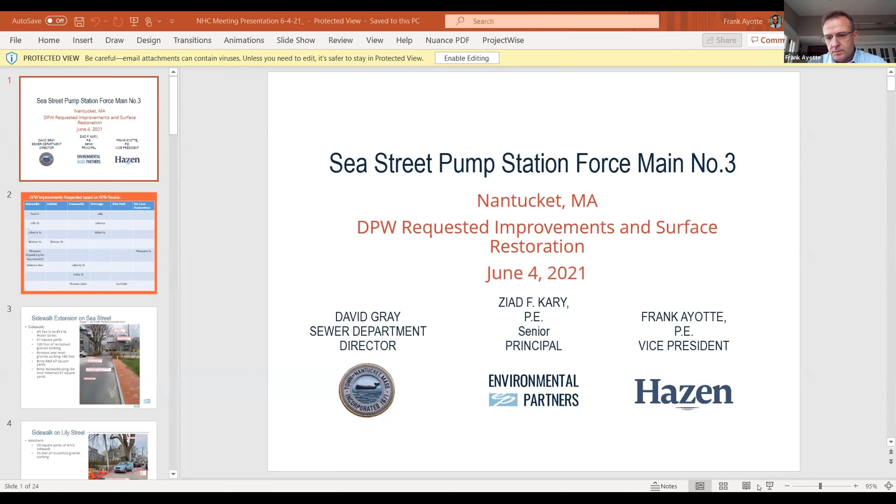So as David mentioned, I'm Frank Ayotte, the owner's project manager for this project, overseeing our designer selected for this project, which is Environmental Partners. You'll hear from Ziad Kary shortly. What we're going to present here today is the DPW requested improvements and the surface restoration features along the force main.

Before we get into the details, we developed a small table to go over what was requested by DPW based on the 60% review of the documents. They include sidewalks on Sea Street, Lily Street, Liberty Street, Winter Street, restoration of the Pleasant Street parking lot, Silver Street, and Atlantic Avenue. Also under consideration is potentially cobbling Winter Street. There's some evidence that there are cobblestones underneath the existing pavement.

We're investigating this, and it'll be included in the project, but like all the other improvements on this table, they'll be included in what's called bid alternates, which allows the contractor to bid each improvement as we group them together in order of priority. That way we can see what prices we get and make sure our funding is in line. We can accept or reject, in order of priority, any of the bid alternates once the project is bid.

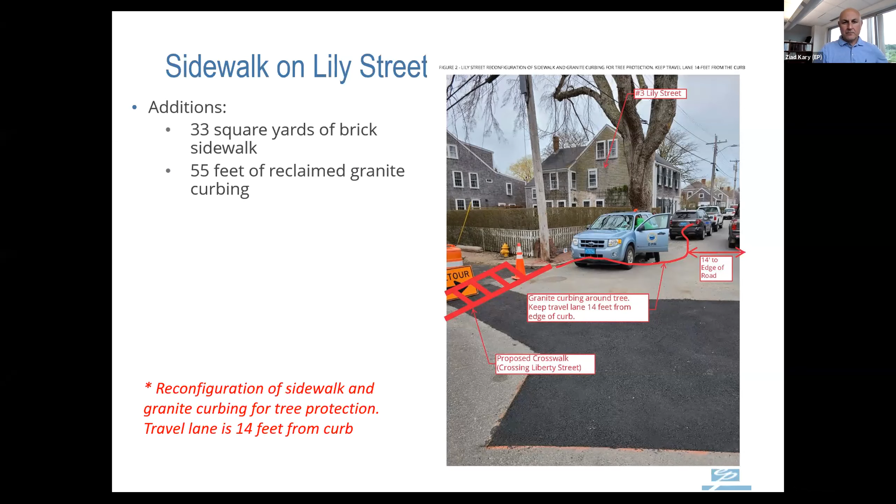This would involve about 55 additional linear feet of reclaimed granite curbing and about 33 square yards of brick sidewalk. This portion of the roadway has water ponding, resulting in icing and tripping hazards, so the intent is to connect the dots by expanding the granite curbing further north, involving almost 200 linear feet of reclaimed curbing, and improving the drainage system along this alignment to mitigate the icing and ponding.

And with the crosswalk work, you'd also do the crosswalk painting or epoxy painting to establish them and make them look like actual crosswalks.

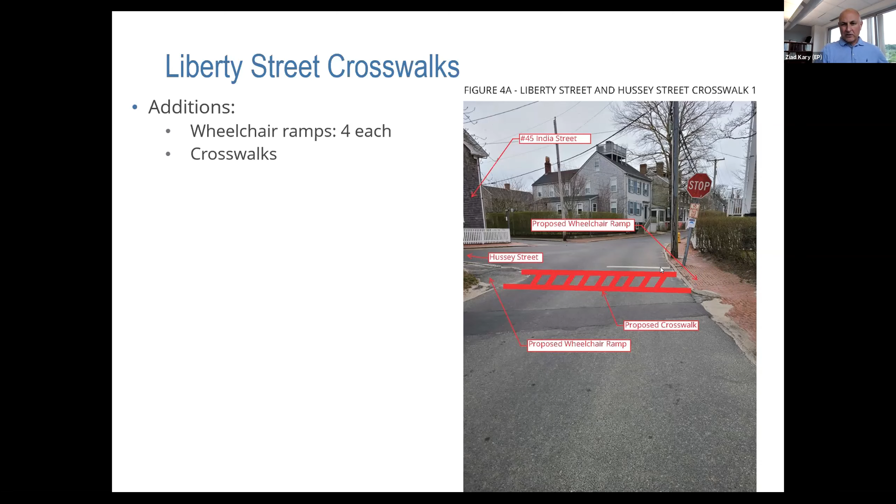At the Hussey and Liberty intersection, there's a patch of bituminous concrete sidewalk in poor shape, and DPW wanted to make that handicap accessible. On the opposite side, by the stop sign, you'd add a wheelchair ramp and establish a crosswalk to make it ADA compliant.

This is the opposite side of the street on Hussey, with another crosswalk. The curbing here would have to be reset to meet ADA requirements, the brick reset, and this asphalt patch replaced with a brick sidewalk. Here you'd have two wheelchair ramps on the opposite side, and further down another two wheelchair ramps as well.

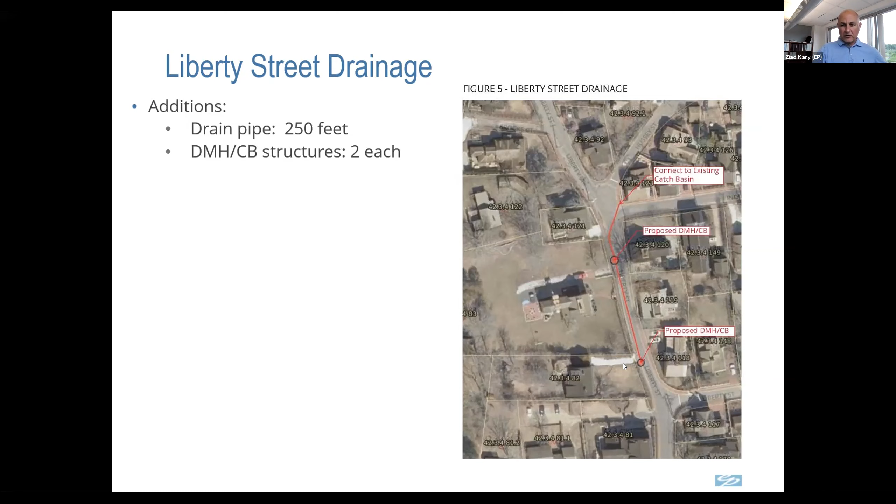This is the expansion on Liberty Street of the drain pipe, which goes hand in hand with the drainage improvement and the ponding and ice damming of water during the winter. So it's basically expanding the pipe, connecting the structures, and discharging into the catch basin on the north side of the picture. This would involve adding two structures, drain manholes or catch basins, and about 250 linear feet of pipeline.

Winter Street, Frank touched upon it. There's a belief out there that, despite the short distance, there are cobbles buried below the pavement. So in the contract documents, we're going to remove, excavate, stockpile, and deliver the cobblestones to the DPW where they're stored. They could either be used back here depending on funding, or the DPW would come back after we install the sewer force main on the left side of the road. There's a water main going below the sidewalk on the right side of the roadway, and we're also replacing the gravity sewer in the center of the road. By the time we're complete, the roadway would be disturbed curb to curb, so we'd remove the cobblestones from the limit of work, and if funding becomes available, they'd be put back as a final treatment on Winter Street.

The force main comes out of Pine Street, takes a right turn, and crosses through the town parking lot in the corner, shown with that sweep in blue. Once it's in there, it's going to be beneath the sidewalk. The reason behind that is we have two asbestos concrete water mains within the roadway, and on the left side there are mature aging trees with massive roots that we didn't want to disturb. The idea is to run the force main below the sidewalk, but in doing so we're going to clip that parking lot, which houses a lot of drainage structures and leaching fields, so we'll address what we disturb there. Plus, the idea is to repave and resurface the parking lot to improve the current surface.

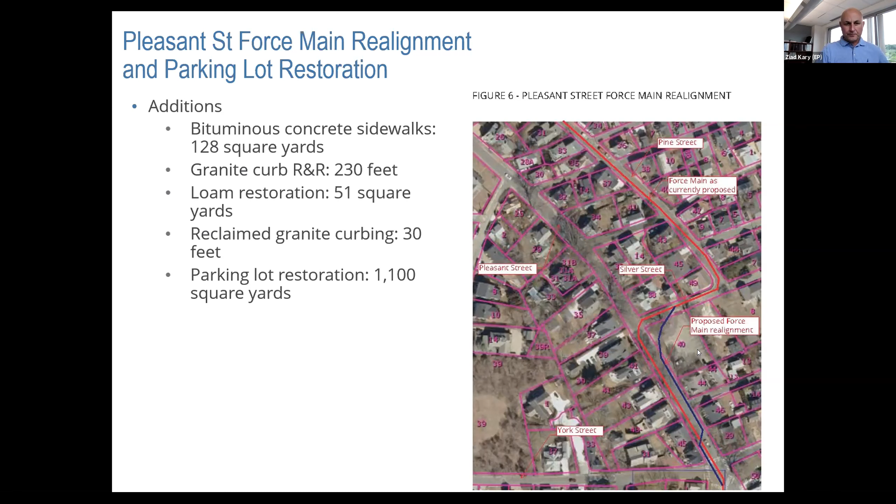On Surfside, once we're beyond Miacomet, the idea is to put the force main within the bike path. The current bike path is about 8 feet wide, and the DPW expressed wanting to expand it—instead of putting it back as 8 feet, they wanted 10 feet. By the time we install the 20-inch force main at 7 or 8 feet depth, there's nothing left of the bike path, so we'd have to rebuild it, installing a 10-foot wide bike path or surface treatment above the force main. That involves about 318 square yards of additional paving, plus loam and seed restoration of almost the same quantity, about 318 square yards as well.

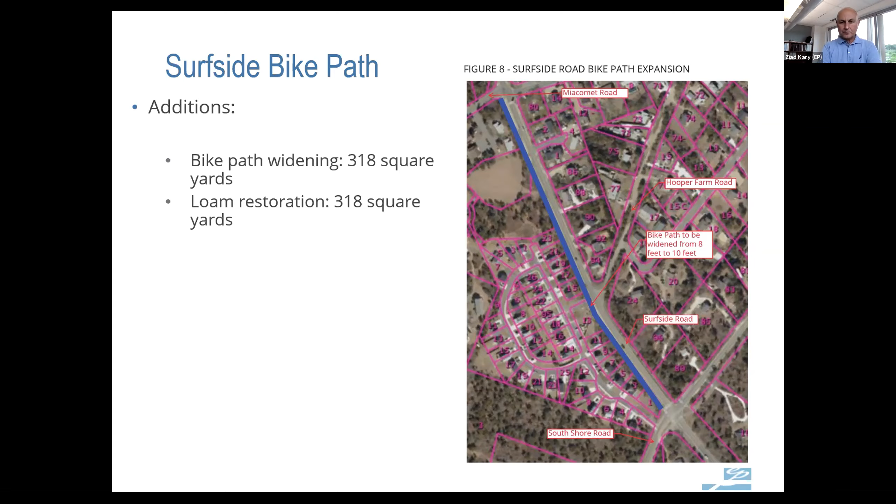And of course, the red brick is the sidewalk replacement, the brick replacement of the sidewalk, and that's really between Sea Street and, I can't really see the corner here, it's North Liberty on the bottom left, and then on the next sheet.

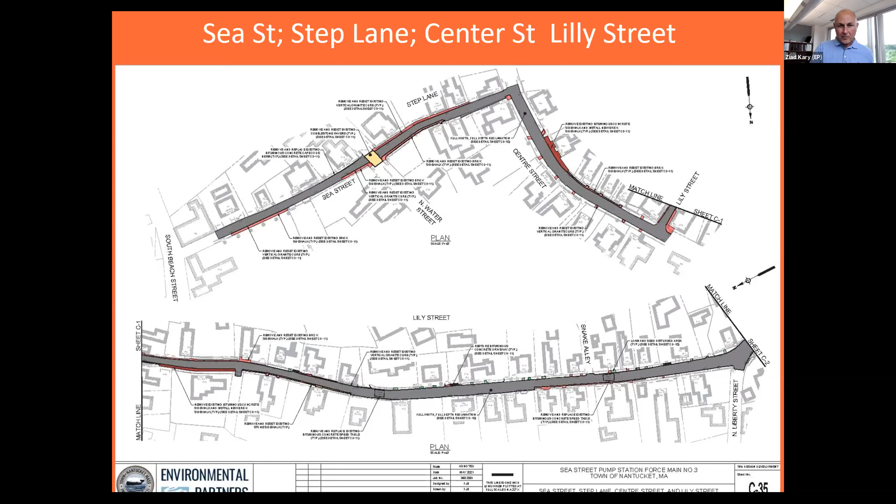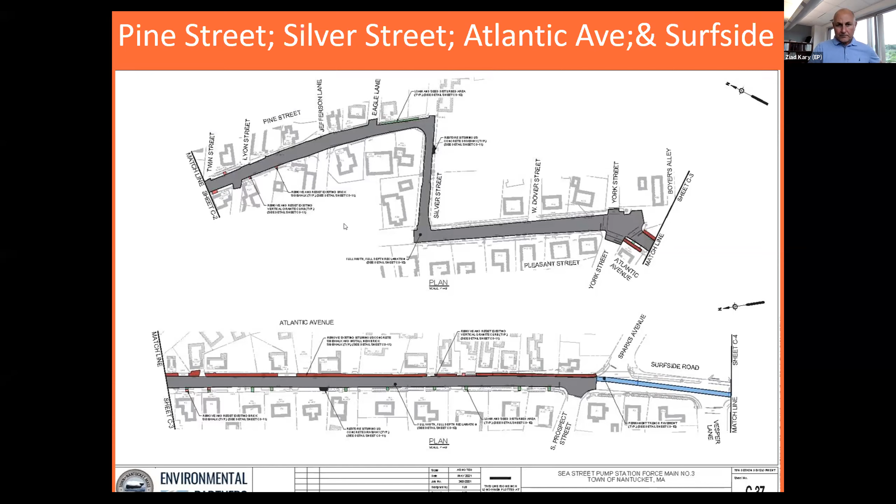Again, this is the rest of it on Surfside Road, which is the same as the previous one. On Surfside Road, from Atlantic all the way up to Miacomet, the force main would be installed in the gutter on the south side of the street, and once the force main is installed, there would be a permanent trench.

Once the work is done, we'd let the pavement settle, come back and grind it, mill and overlay once the work is complete and the trench had enough time to go through the freeze thaw cycle and settle. Then once it's done, we clean it up and finalize it. The bottom blue here is the Surfside portion where the force main would be installed within the sidewalk, within the bike path.

Same thing here on South Shore Road. Basically we stay within the roadway, and David has some other plans to install gravity sewer on South Shore Road. So if you were going towards the wastewater treatment plant, we'd be using the right side of the roadway to put in the force main, and the surface treatment would simply be a permanent trench until the other portions of the work are completed, and he would come back and mill and overlay it.

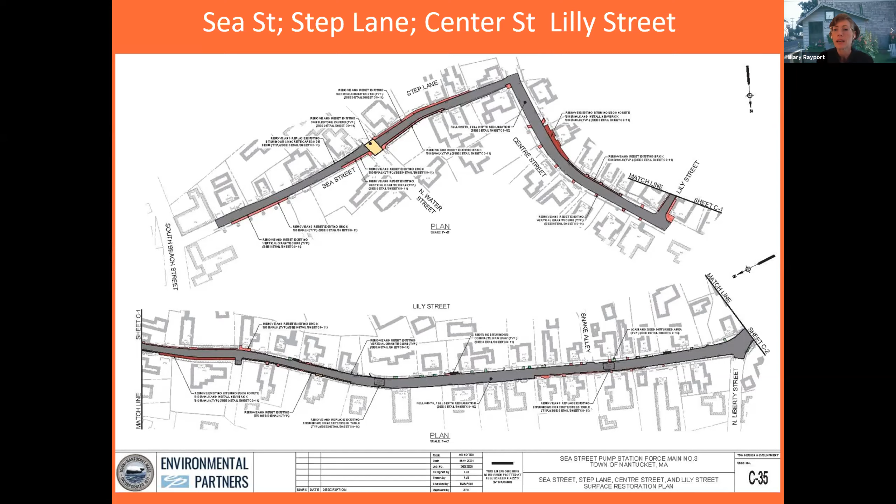Tom, Frank, would it be okay if I shared the document we put together? It might help organize the things Tom and others are concerned about or have questions on. Sure, could Hilary bring up some of the items and locations on Lily Street while doing that.

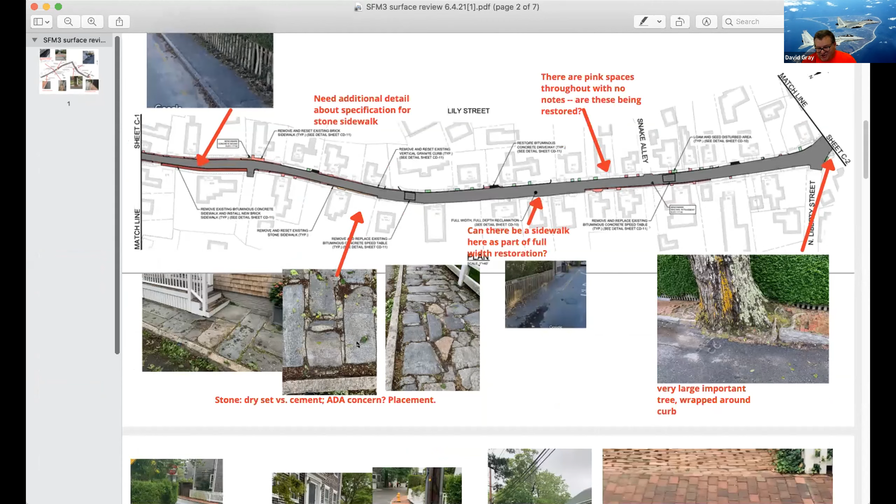We will need to address the areas in red because the current gravity sewer line on Lily Street is not within the proper road layout as it is now. It actually goes very close to or under a couple of homes on Lily Street. So when we come through with the water, sewer, storm drain, and gravity line work on Lily, we're going to try to realign it to get it off of where it shouldn't be, especially the gravity line. I know this home specifically that Tom's talking about on Lily Street.

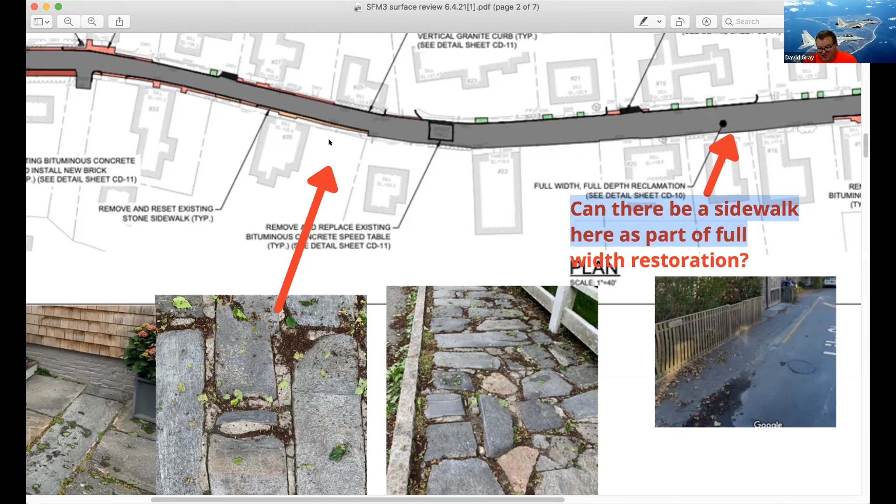This is one of the areas where the alignment is wrong, down closer to the old Bennett property, that's where we have an alignment issue. Where this house is, not so much, but if there's something there, we're planning on returning it to prior-to-construction condition to the best of our ability. There'll be two issues there - you may have a situation underground, and this property would be adjacent to the Bennett's garage. We're also concerned about any ADA situation, Mickey can speak more to that than I can.

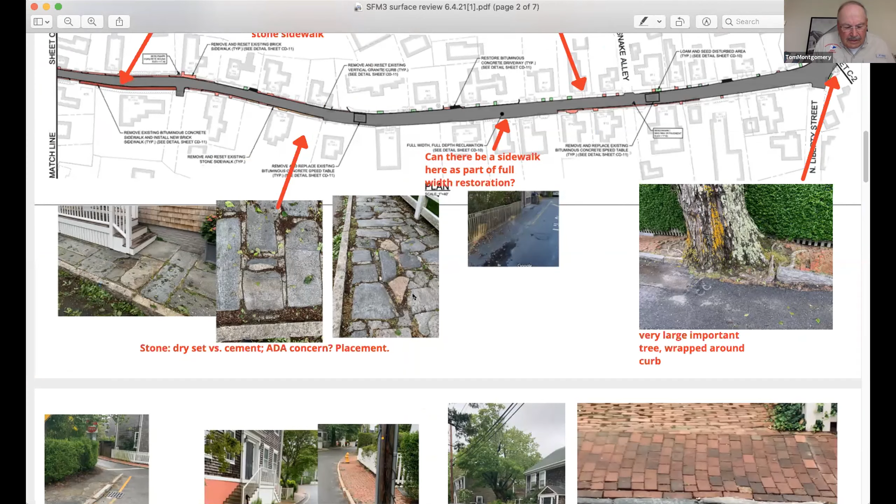Let me go on, I don't want to belabor all this. On Liberty Street, where you show it meets North Liberty Street and Gardner Street, that section there by the mailbox up Gardner Street - that's a very, very narrow area.

If the curb was low, like they were going to do on Sea Street, I could see that. But I live on North Liberty Street and go by there 20 times a day. I've actually been in an accident right there where they're going to put that handicapped access across the street, and they put a stop sign there for that reason. But when somebody comes around from Hussey Street and makes a sharp right turn, or is coming down from Gardner Street onto Liberty Street, and eventually either Lily or North Liberty Street, that section is only one car wide.

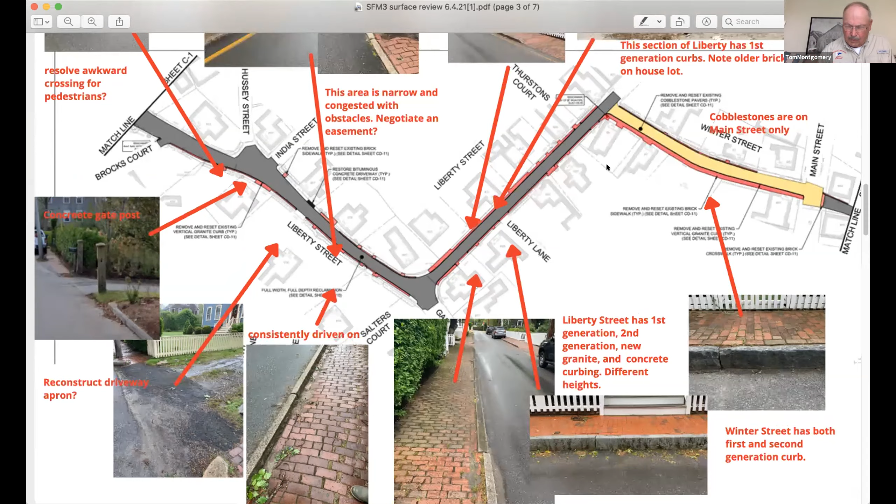So if there's a sidewalk and curbing there, I think that's going to be really narrow unless they make it a 1-inch reveal. The reveal in some of these curbing areas - many of these roads are impassable without accessing the sidewalk, particularly on some of these two-way lanes. So the curbing will not be a 6-inch reveal, because it would be problematic to even pass a car. The curbing reveal will be somewhere below 4 inches or so, because most of these streets were designed for a horse and cart.

And on Winter Street, there is some antique curbing, or schist I believe, on the left-hand side where there's going to be a lot of digging because that's where the water main is. I'm interested in the cobblestones - I don't know if it was you guys or the town doing something else, but they dug a trench there last year, the full length of Winter Street. I don't know if that's when they discovered the cobblestones, but I think so. That was the DPW installing a drain pipe in the middle of the street, so that's where the evidence of cobbles came from - just being mindful of this project.

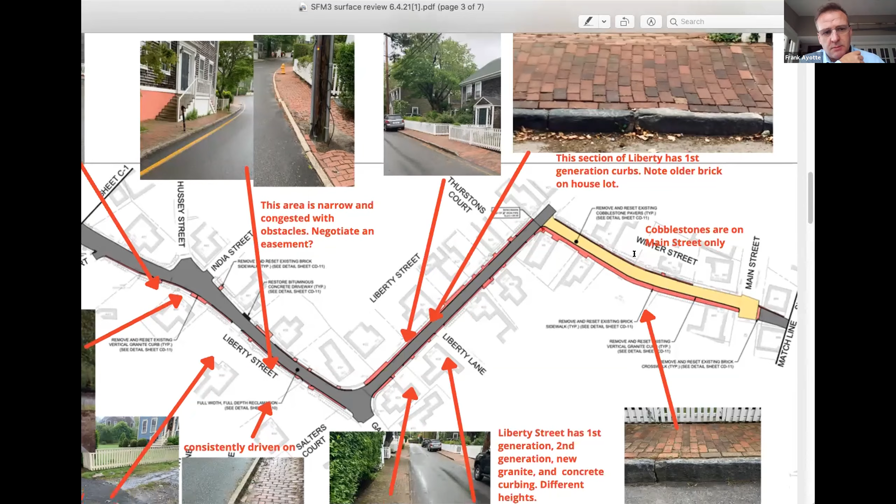Yeah, it's important. It's pretty much a means and methods thing by the contractor, but he'll be directed to do that. The brick is generally stockpiled. It's a smaller piece that can be fit pretty much as you take it apart, you can put it back together because it's small enough. But the curbing is a different animal.

If I could jump in quick. One other thing that's going to be a requirement in many of our jobs, at least since I've been in charge, is we do pre-construction video and photographs of all areas of construction. Then during the project, we will have an engineer on site the whole time, photographing all the work. At the end of the project, we will be able to take the pre-construction, during construction, and post-construction to match everything up.

We did that with the Sea Street renovation project that Frank was the design engineer on. We actually even did 3D video and photographs of that. That's important to me, as a local kid anyway, to bring everything back to what it was the best we can. So that will be another piece of our requirements that we will look for from the contractor.

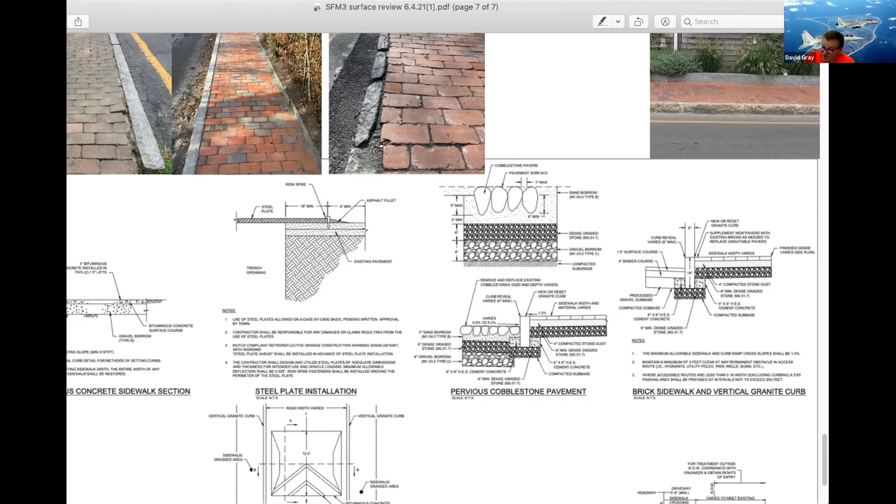To add to that, we do have what's called geotechnical monitoring because we are digging trenches next to older homes, some with brick foundation shelving. We do install almost like a nail in the foundation to monitor whether or not there's any movement, and that is certainly along the historical district where the homes are. This becomes pretty critical, so in addition to the construction photos, we will be monitoring the earth in the vicinity of the trench to ensure there's no movement.

Frank, on that topic, I put up this specification page so we can talk specifically about some of those details, but since you bring up the foundations, how deep do you expect the trenches to be along the route? Sure, like on the narrow Pine Street, which is densely populated with quite old homes and very narrow streets, how deep and how wide at full depth will the trenches be?

Sure, Ziad, I'd like you to comment on that since it varies along the route. Yeah, absolutely. So basically, the force main is the lifeline of everything. If the force main were to be compromised, I don't need to tell you exactly what goes on, but stuff flies all over the place. So we'd like to keep it deeper than existing utilities. If we're replacing water, sewer, drain along the corridor in the alignment, at a minimum the force main is probably going to be running between 5 to 7 feet deep.

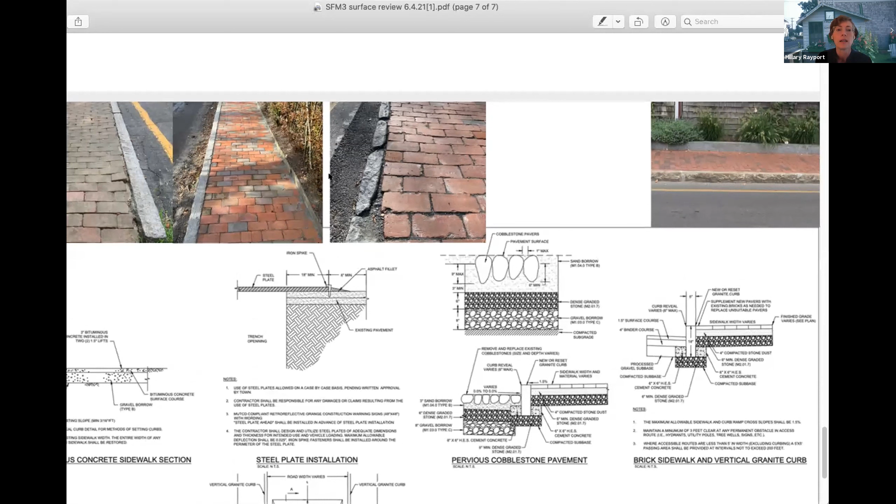I want to point out a couple things — some of these photos were in our document on preservation and maintenance of historic pavement. You might have seen it before, but this is what we ended up with here: this picture where you see new asphalt and the schist curbs just barely peeking out. This is on Fair Street, right around the corner of Judith Chase Lane.

So this is a picture of the sidewalk on Judith Chase Lane before it was lifted and reset by the DPW. And this here on the right is the sidewalk — not exactly the same place, but it's a very short street, so you basically get the idea of what it looks like along the whole length.

You can see there were a lot of bricks that needed to be replaced — I'm not sure why, presumably they were broken. The curbing looks good; we would have said this sidewalk doesn't need to be replaced, that would have been our view, but it was replaced. I think you can see the effect of the brick. Then when the work wrapped around the corner to Fair Street, where these very old curbs were — Judith Chase Lane had these second generation curbs, but on Fair Street they ended up with these curbs just barely peeking out of the asphalt, and they're in a concrete trench.

So how can we adapt this specification so that we've prepared and planned to accommodate the material? We don't want to come into a situation where the intent is to save the material, set it with the correct reveal, but we've created a situation where the people in the field can't actually do that.

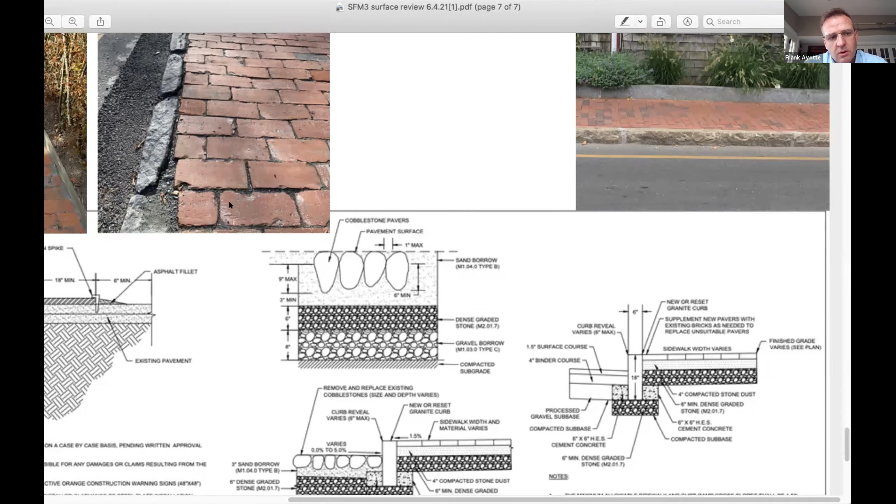You mentioned you didn't know why the sidewalk in that picture had to be replaced — our view on something like this is, if we're not impacting it, we're not touching it. That's kind of the tact we've taken during the design and routing of the force main.

That's great, and I also just wanted to call out for everybody this detail that you have here.

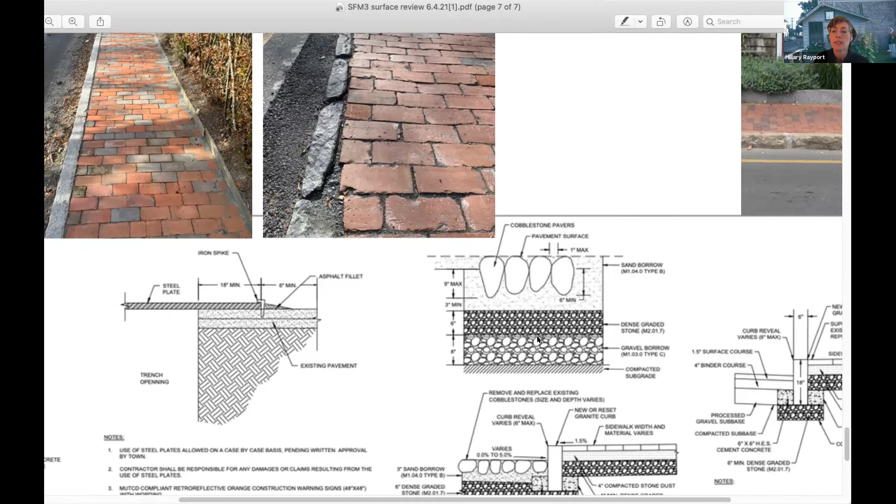We can hear from other commissioners as well, but I think everybody would say that this looks quite good because it's particularly meant to be pervious. And past specifications of cobblestones have actually intended to be impervious. And you're the stormwater people, so I'm sure you understand why it's better to have it be pervious.

So one of the objectives that we have based on the engineering report we shared with you, that was shared with the town and us, was could we do some tests? Is this an opportunity to do some intentional tests of the cobblestones?

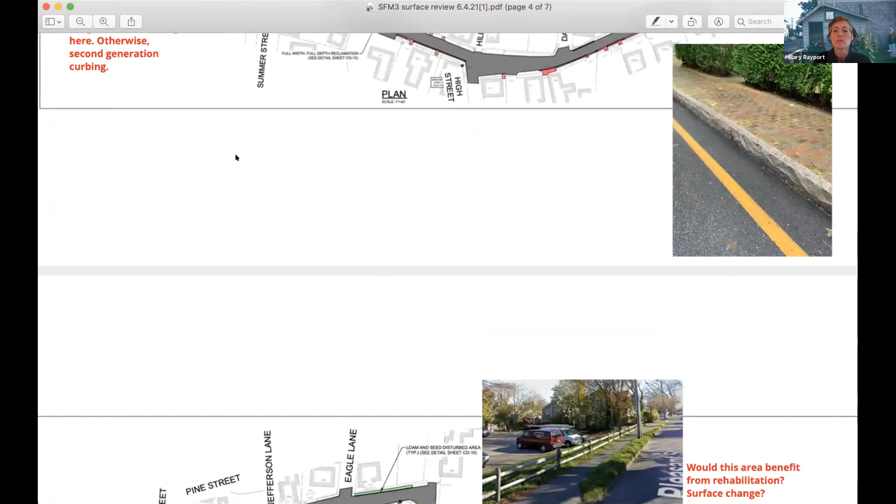So where you cross Main Street - I'm just finding it, well, I mean it must be here. That's Pleasant Street. Where you cross Main Street here, and also where you cross North Water Street, you'll have the opportunity to relay these cobbles, and you'll be using a specification that's different from what the rest of the street was laid in.

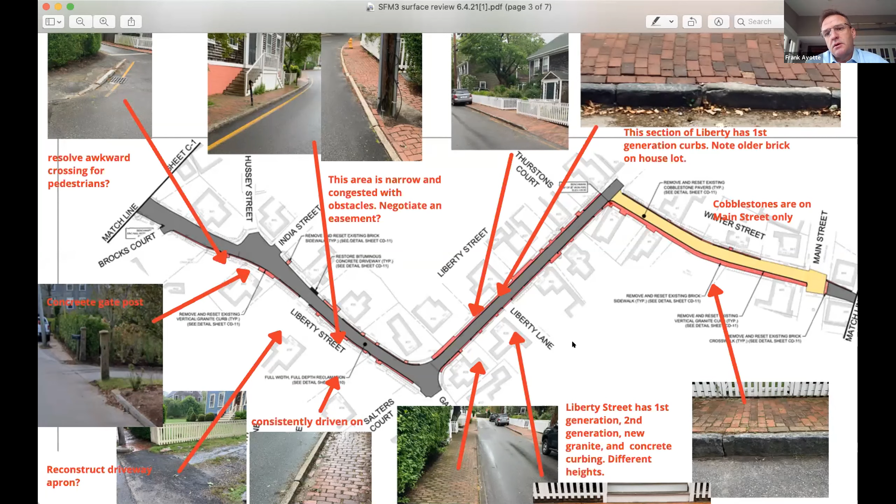Have you seen this what Stantec wrote in response to the engineering report that was done by the Community Foundation? So those details were obtained directly from DPW as the approved details for the cobblestones. I think that was all based on the Stantec report - I think Stantec maybe even developed the detail. Yeah, I think they did. Yeah, that's what we took from them, from that report.

So this detail, are you talking about this detail was given to you by Stantec? It was given to us, DPW. Oh, okay, so the DPW has then updated and modified their specification. Correct, yeah. Using the latest DPW details in what you see in this version of the design drawings.

Okay, great, we didn't know that. So that's terrific that they're being responsive. So maybe it's really a conversation with the DPW, because what we'd like to do is try some different settings, since there's no official specification for cobblestones. Try some different settings and then watch them for 4 or 5 years and have it really be an experiment. So to the extent that that could be supported in this project, I think that would be really a good thing. I mean, I think it's a conversation you probably need to have with DPW.

You know, we're taking their standards to apply them to the project, because these standards, according to them, have been vetted with the different community groups, and they're responsible for the streets. So, okay. Hilary, have you heard anything from DPW about this new specification? I have not. Okay, well, we can follow up with them. Be good, really good to understand it a little bit better since we're seeing it for the first time.

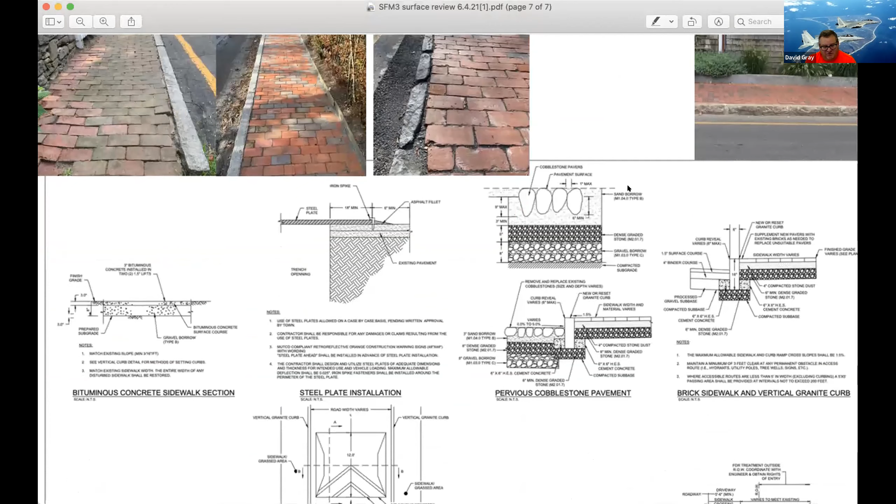Another key point on that Main Street section that you just had up, Madam Chair - that area was actually completely disturbed in phase one of the sewer repairs back in the early 2000s, stretch 2005, 2006. Yes, so I'm intimately aware of that actually, David, since I happen to live there. That layment there was definitely much different than other pieces of Main Street.

And I believe, isn't North Water Street fairly more Belgian block in certain areas than it is cobbles as well? Yeah, it's completely Belgian block, and it's also new, I think it was done in the 80s. Yeah, I think when they did something, they dug it up and they wanted the cobbles back or whatever.

I know what you guys don't want to see is something similar to, or maybe you do, is what they did at the Center Street end of Liberty Street, where everything's in a straight row. The cobblestones were laid in straight rows or whatever like that. That's something that I know Frank's team and Ziad's team will be very careful on who we have that will do any kind of cobble work in the areas that we disturb, just because not everyone can do cobblestones. I've seen it firsthand, it's a talent all by itself. And so I just wanted to call out that Main Street section, and I'm glad you were aware of it. That was not laid the old timers way, put it that way.

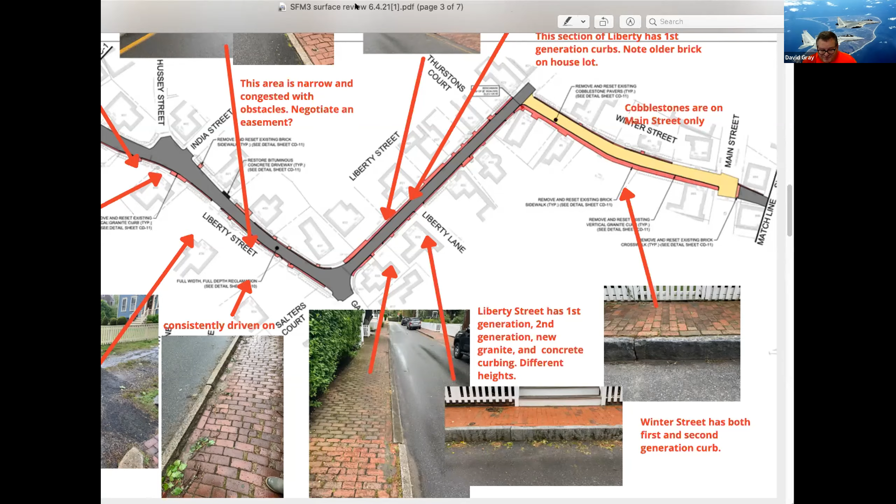One thing I'm lucky about with your commission, I've worked very closely with Mickey over the years, and for many years with Tom, so I know how some of the board members think and operate. That's a luxury most other directors don't have. So when Tom started with his questions, I already kind of knew where he was going, just because we work so closely together. David grew up across the street from our house on West Chester Street. Yes, I did.

Hilary, would you mind sharing this document you put together with us, either through David or otherwise? Yes, I can share the engineering report.

There's also a history of the cobblestone roads, which gets at exactly what David is talking about. What we've been able to put together through our research is that cobblestones were state-of-the-art pavement, the best pavement for Nantucket in its most prosperous days in the 1840s. But as the technology came for bituminous concrete, the people doing the cobblestone pavement moved into the concrete business, and the ability to cobble the roads was lost. The knowledge was lost. The roads became increasingly in disrepair because they kept getting excavated, as Nantucket was very early in sewering the core downtown and putting in water mains.

Those all went under the streets, and so the cobbles weren't put back correctly, and it was a real headache, to the point where there was a lot of agitation to just get rid of them, and many of them were lost.

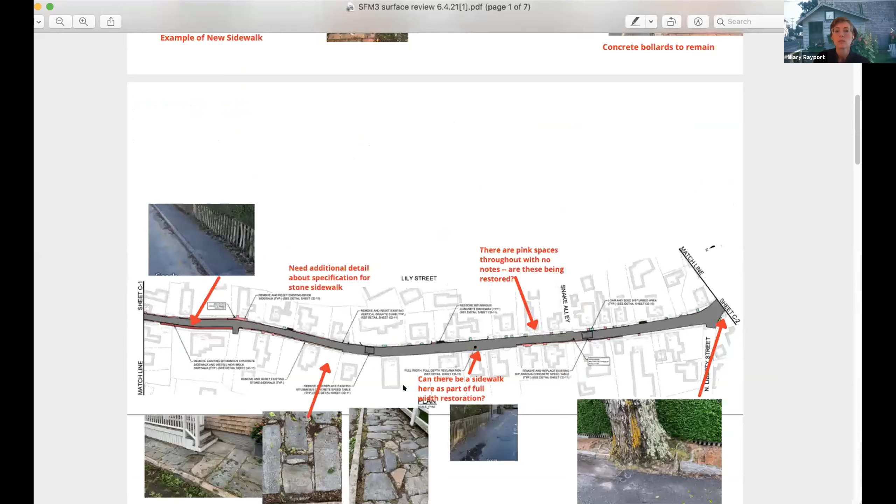Okay, so maybe we should talk to DPW. That's what we have to go through, because if we veer away from the DPW standards and this becomes more of an experiment, it would really run the project into serious delays. There's a big process into approving materials, right? So I'd recommend going through DPW on things like that, because we're taking these standards directly from them—in our conversations with them, these are the approved standards for the town of Nantucket. That's what we're operating under.

So as you can see in this picture, this is why we have— does anybody else have concerns about this? I don't want to assume I'm speaking for the commission. In regard to the type of brick— well, I'm talking about the appearance. Yeah, yes.

I think if we could explore what the options are, if they're all equal as far as price, are some going to match the non-new bricks better? Throughout town there are various styles, types, finishes of brick, but all of them seem to blend together except for the new brick, which just reads as new. So we're talking about the lower part of Main Street and maybe Water or Beach Street.

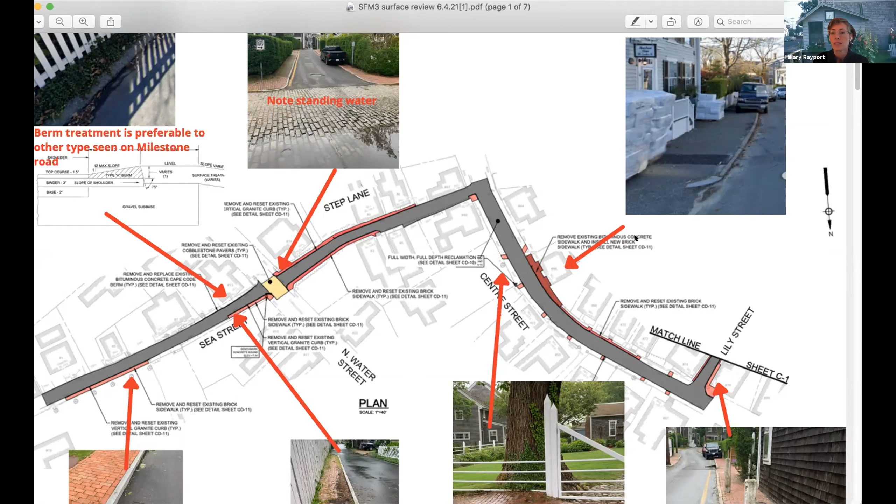Okay, well, it sounds maybe like Holly, our commission, the HDC, and the DPW should work something out and see if we can advise on this project and do our best.

If I could just jump in a little. We may be using the guidance and specifications from the DPW, but this is not a DPW project, this is our sewer project. The reason I chose this route specifically over other routes was the fact that all the sewers in these streets we will be going down, many were installed in 1917, others in 1920. So this route was chosen over others that other departments may have wanted, because we were already planning on replacing sewer, water, and limited storm drain in some areas as we were going through this whole project.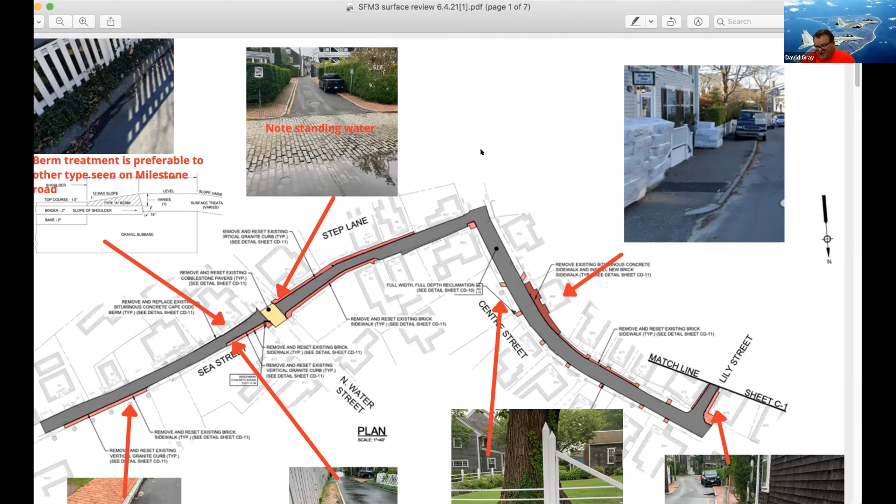I do note that the slide you have up now shows something that's been a thorn in my side for many years since I've been here, even though I don't deal with stormwater. That North Water photo showing the standing water, they've tried to put that on my plate for numerous years because I answer the phone, which I shouldn't sometimes. But that water comes from across the street, right behind that one-way sign on the left there. That's a discharge from their foundation system that pumps straight out across the sidewalk. We have tried to come up with a solution and a remedy for that. When we come through this area, will we try to install something to capture some of this runoff water? Because it impacts Matt Parker incredibly in the wintertime at Seven Sea Street Inn. We're going to try to make improvements as we go along this route.

The Sea Street thing itself, right where you have that other photo down at the bottom, at the intersection of North Water - when we do our final survey and layout, we may very well find out that fence is on town property, that it may be an encroachment. Once the teams finally do the final absolute layout, we may find some serious encroachments on some of these areas that may need to be rectified during this process.

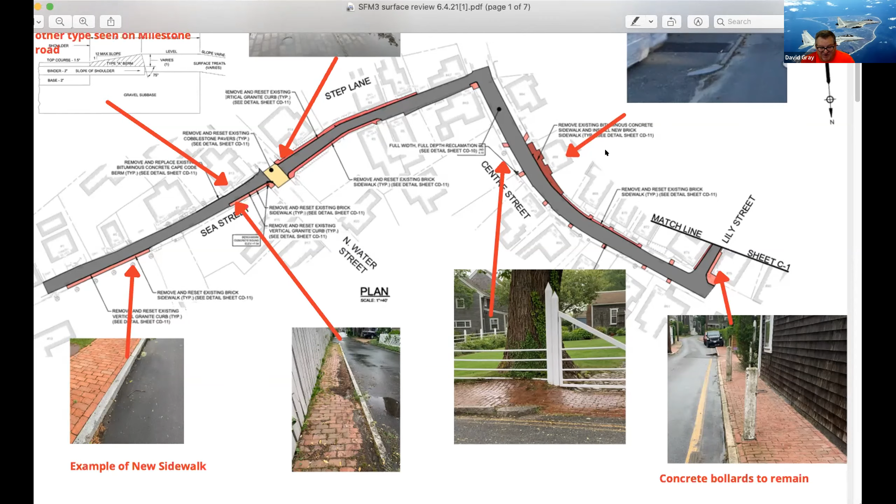Working with Mickey over the years on the commission, and Tom, things tend to grow out on Nantucket over the years, and when the town tries to come back in and reclaim it, it becomes an issue. But we are going to do everything we can to make improvements. That puddle at the end of Sea Street has been a thorn in my side since I started in my position, and when we go through there, I hope it won't be there anymore.

The reason I noted it was, we have this question about if we improve the permeability of the subsurface, would these things drain? We found a reference in archival material about this, the superintendent of streets back in the 40s talking about how the water drained right through the cobblestones and how great they were for that reason. So even though this isn't beach cobble, it is a cobblestone street. Maybe with the improvement of a sand bedding, this puddle wouldn't stand here as long.

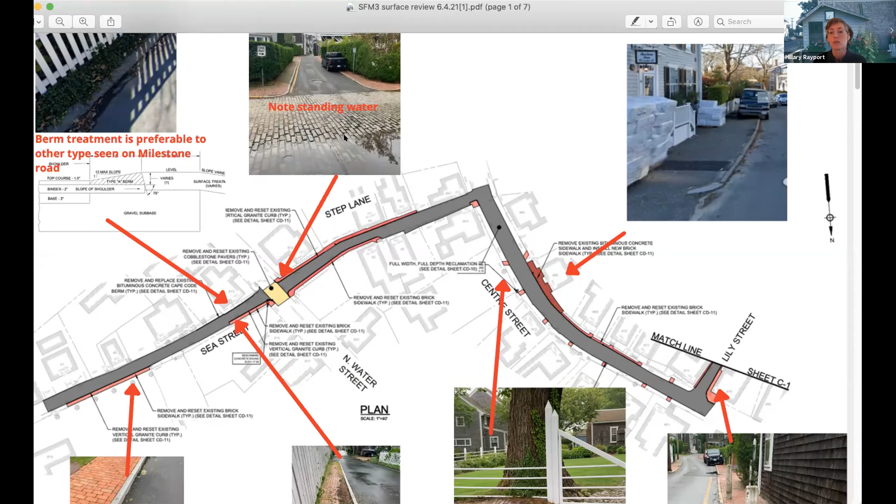This was when there was a huge rainstorm, so it's a very wet time.

Just to add to this a little bit, we've done about 132 geotechnical borings along the alignment to look at the subsurface conditions. Everywhere besides Sea Street was dry, so you didn't have any presence of groundwater. It's really a function of permeability, not so much of the brickwork, but the material that surrounds it.

And then obviously it's the degree of compaction when you put it in and prepare the subgrades to accept the brickwork. So this is something that's probably going to take some effort and research, and maybe a few trials to see what works over time. But for this purpose, we could certainly specify whatever you want us to for the degree of compaction, whether it achieves 95% below the cobblestones or below the brick, or maybe less than that, to make sure the water goes through the subgrade. But again, on the flip side, we did not find any water, which is obviously good news.

In our Division 2 specification on earthwork, we could make recommendations in terms of compaction effort and bedding based on... I just looked while we were talking, I looked at the document that was produced, but there's nothing specified in terms of the brick. I think what it says is trying to replace everything in kind. That's what they're looking for.

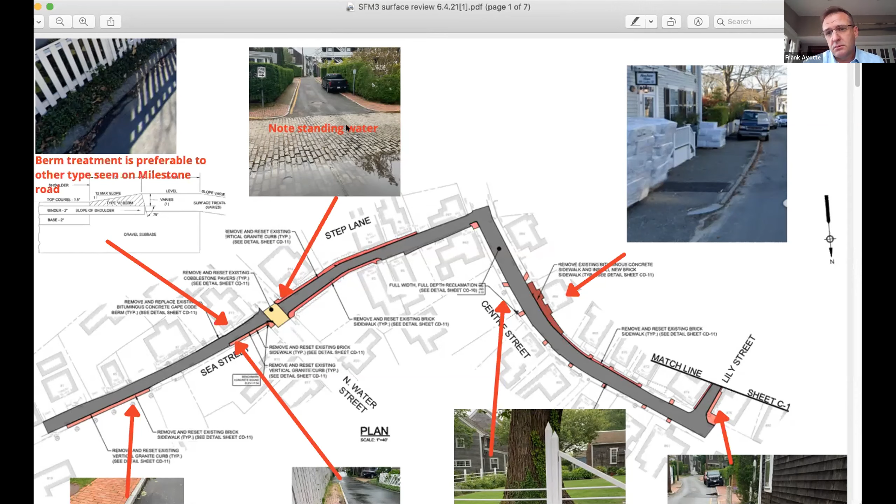We did want to comment that your berm treatment we liked a lot - when I say we, I mean Mickey and Tom and I, maybe other people have some thoughts - but it's very different from the Cape Cod berm type that's been used in other places in the new work, like for instance the bus pullouts on Milestone Road. So I just wanted to mention that.

One area, these concrete bollards - let's talk a little bit about these. This is at the corner of Lily and Center. We'd like to see these bollards stay.

They show something about how things have been done over time. I think they're fragile. Some of them are falling apart.

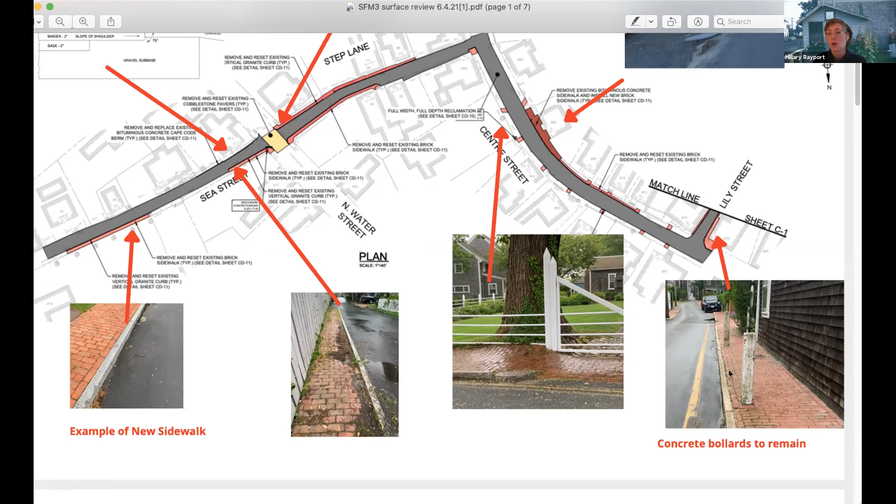I understand, the ones that are really falling apart, I don't think we're asking that they be repaired necessarily. We certainly don't want to create some false sense of history. But the ones that are there that are in good condition, we'd like to see them stay. So that probably means marking them and instructing that they remain. Yep, that'll be notated on the drawings.

Okay, thank you. Lily Street. So this stone now - Mrs. Elliott, who lives here, had all of this replaced because she did foundation work, or sorry, not replaced, lifted and reset because she did foundation work. This area obviously it's a little bit close, like as you're walking with your back to Center Street, this is a little further down. You can see it's set in concrete, and it's also got a fair amount of variability.

So the notation is remove and reset existing stone sidewalk. Presumably you need to get under here, but David, you said you might be able to move this. So our question is, do you need to lift this or has that changed? If you need to lift and reset it, there's just going to be a lot of details that the contractor is going to have to understand about concrete, no concrete, the width of the stones, the width of the spaces between the stones. So how do we get a little bit more specific about that so everybody has a predictable result? This is going to be where our pre-construction videos and photos come into play that are used very intensely in some of the planning.

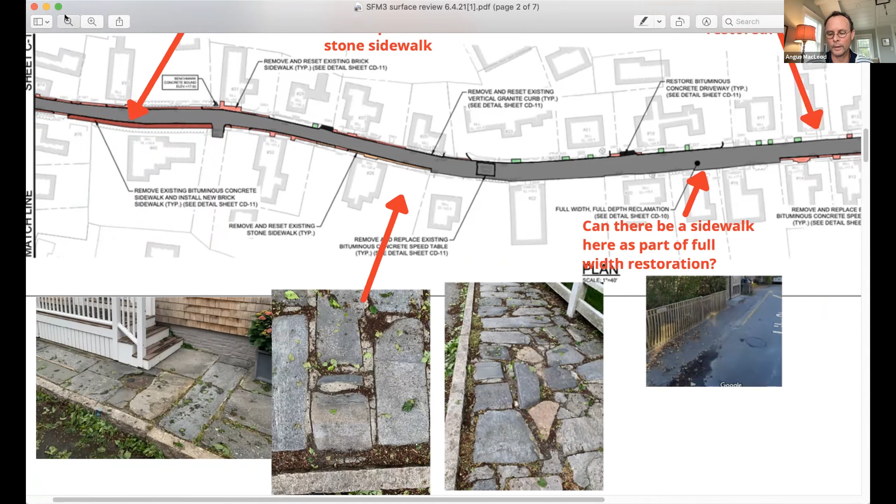Thank you for commenting on that, Frank. That was going to be one of my questions for David. When you were saying that when there's a note for remove and reset existing, when we have a situation where it's not meeting ADA or the existing setting in concrete should not be that, it should be dry laid, is that a call that you make? Because you were mentioning that you take photos, but in this case we probably wouldn't want to replace it exactly as you found it - but that's going to be a call in each circumstance.

Correct. And just, you know, common sense in something like this - the dry lay versus concrete. A dry lay is more of a natural look, more historical, through permeability and the rest of it, than say a concrete-seamed stone walkway, which will look more, I want to say, just kind of new and probably not suitable for the area, in my view.

We agree - this is something we would work with, we agree with you. We don't want to repeat what's in front of the Thomas Macy warehouse. And you don't want to try and do a mix and match of this, because that would be a disaster on an install.

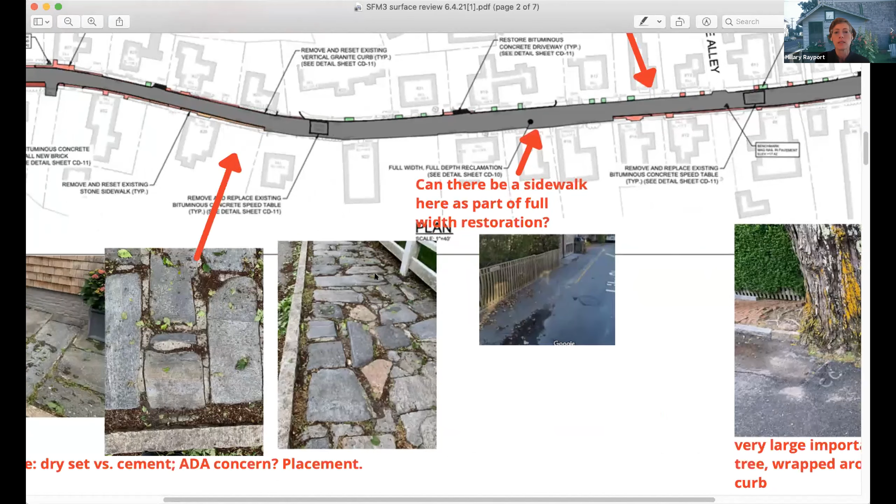Yeah, your comments about setting it in stone dust, dry setting it - it's correct in what we would agree with. We just wanted to point out that this is a level of detail we want you to be aware of so that you can be sure it's reflected in the final document.

Here, it doesn't look like there's any - we don't want to put more expense and more work on your plate, but just as, and you know, we're the historical commission, not the pedestrian - the BPAC - but I would think you'd want to put a sidewalk here where it's missing. Yeah, I think it's roughly here.

Just a few comments on that - so DPW did walk the route. Holly, were you with Rob when you walked the route? I actually did go on a walk with him and the planning director, at one point. And what came of that walk was what we presented in the presentation as kind of the most critical elements that he would like to see as part of this project.

Because you could do a number of additional improvements on the entire corridor, but some of these improvements that are requested are not funded by the force main. The SRF will not allow funding for paying for items that aren't directly impacted by the force main. So, where do the funds come from?

Well, they come from Chapter 90. Holly mentions CPC funds perhaps, or maybe even some existing funding that was already approved by town meeting for sidewalks and storm drainage. So the elements that DPW requested here all have funding mechanisms attached to them, in an order of priority to be included in this project, but won't be paid for by the force main, will be paid for by DPW through these funding mechanisms. We will be putting together a presentation for the select board that will go through these items along with where they're being funded from.

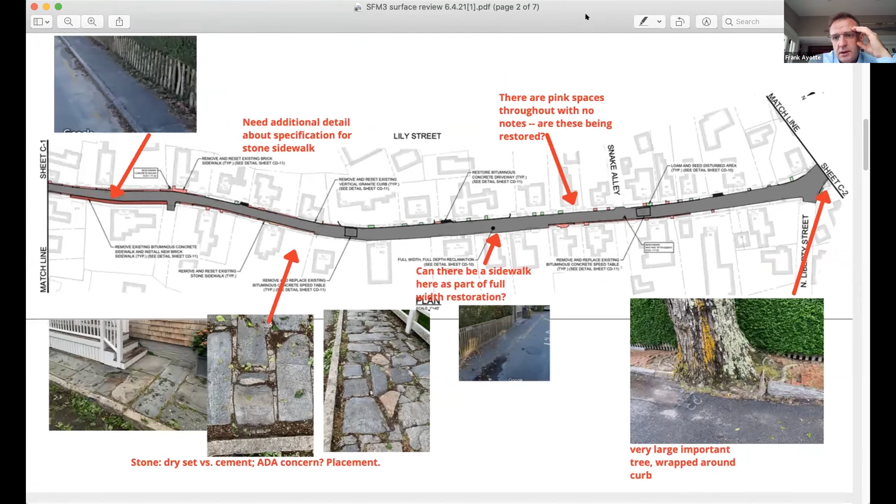So this comment, there are pink spaces throughout. We now understand these are areas where you need to disturb, and you'll lift the brick and put it back. Presumably, if you have to take the curb up, you'll take it up intact, not cutting through it. That's correct, so it's going to come up in full lengths, whatever length it is.

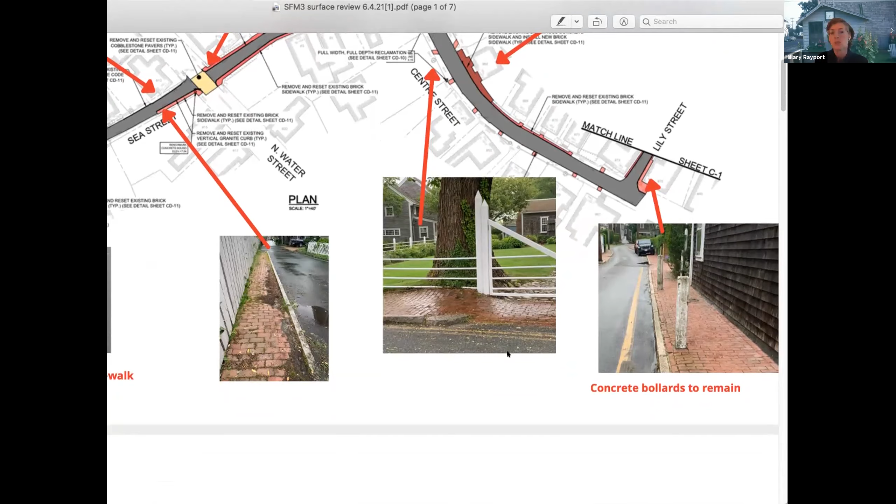So these trees, there are maybe 5 or 6 really large old elms, the heritage elms we care so much about on Nantucket. I breezed past this one where you said you're doing some modification of the sidewalk detail, but can you talk about the process for protecting the trees, especially as you're excavating? Even in the center of the street the tree roots are everywhere, so what's the process of involving arborists? This one has the tree growing right over the curb. What's the aesthetic and practical approach to getting a sidewalk here? What can we expect? That level of detail wasn't in these 75% plans.

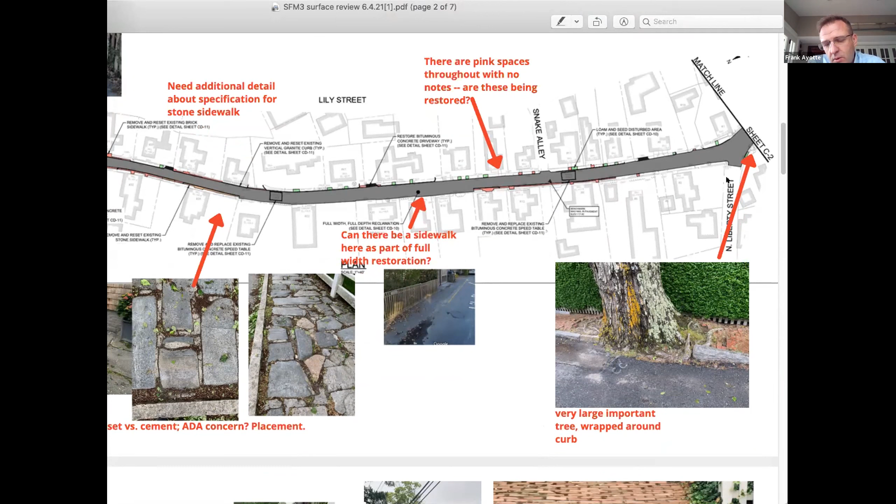Sure, I'll speak to a little of this and then have Ziad chime in. In areas like that tree down at the bottom right, obviously in the vicinity of our force main, we want to stay away from that. Even any reconstruction of the sidewalk in and around it becomes an ADA compliance nightmare on something like that, and we'd probably need a variance for it.

I can point out that where we go by the Pleasant Street parking lot, we specifically went through the lot and along that gutter line on Pleasant Street to avoid the trees on the other side of the street. That's kind of our mindset as we travel through the route.

Now, this particular tree is at the corner, looks like North Liberty Street - I don't know what the other road is. This is where Lily Street passes North Liberty Street and turns the corner to go up to Liberty/Gardner Street on its way toward Main Street. I don't believe our force main clips this area of the tree very closely. Right, this is where Rob's car was parked in that photo.

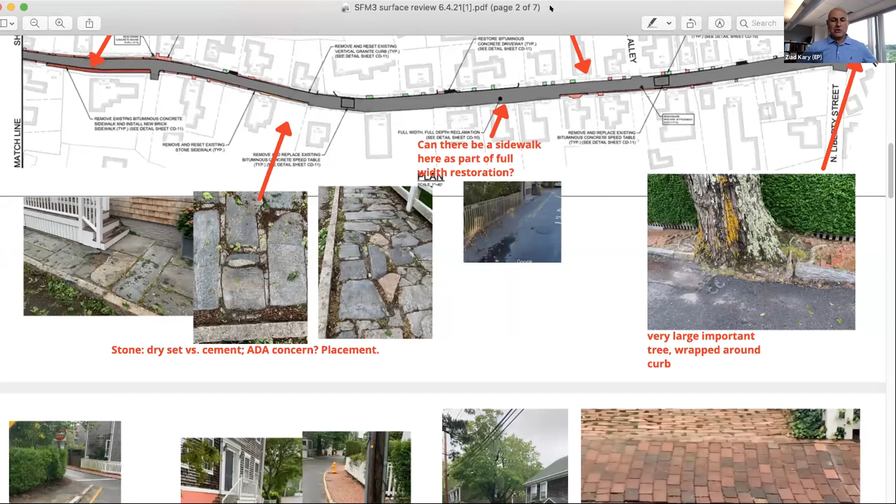So this is the area where we're reconstructing the curb around the tree. Is this the tree? No, I think where you said you were reconstructing is different - not that one, the one we're reconstructing is at the corner. I don't think we're anywhere near this one particularly. The roots could expand a little since these are mature old trees, and I don't know enough about them, but we specifically avoided being close, like the case on Atlantic - we stayed on the opposite side to avoid them. And here, I think we're in the middle of the road, so we shouldn't be anywhere near the root system.

Okay, I think this is what Ziad was describing - there was actually a sketch with a photo of the car there, and then a line drawing showing the sidewalk around it, if this was the actual tree at that corner, so the sidewalk would come around that tree. Yeah, do you want to show us the drawing? Maybe we should look at that. I can, let me bring up my presentation again. I have it open if you want me to share mine. It's up to you, go ahead, Ziad.

The thing is, when you get around the tree, then you get to the corner where there's a telephone pole and a fire plug. So you want to get access around the tree, but then you've got more stuff in the way. So does that really help?

Does it make sense? That's the tree you're talking about right there. I think that's the same one. Here, so we're not even anywhere near. Plus this curbing and sidewalk expansion or extension certainly would help. And as you mentioned, I think the curb isn't that deep anyway, so you're really not into the root system either way.

So I don't think that's an issue for us in terms of the installation of force main or gravity sewer for that matter. So it's really just a sidewalk reconstruction, and I guess we'll be able to see what they're planning when we get the drawing. It sounds like they're just trying to build the sidewalk out to go around the tree, and it'll be shallow, correct.

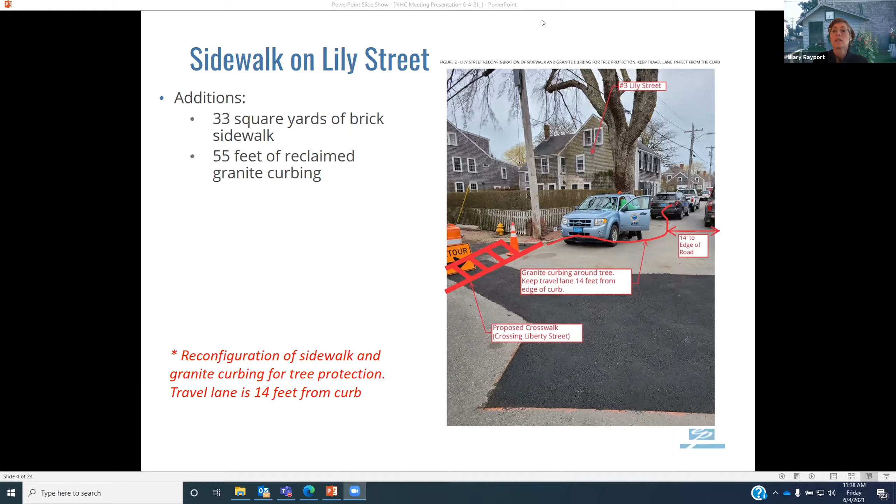Can I share that document again? I'm just going to get that back up, because I think there are a lot of things that we flagged that you all flagged as well.

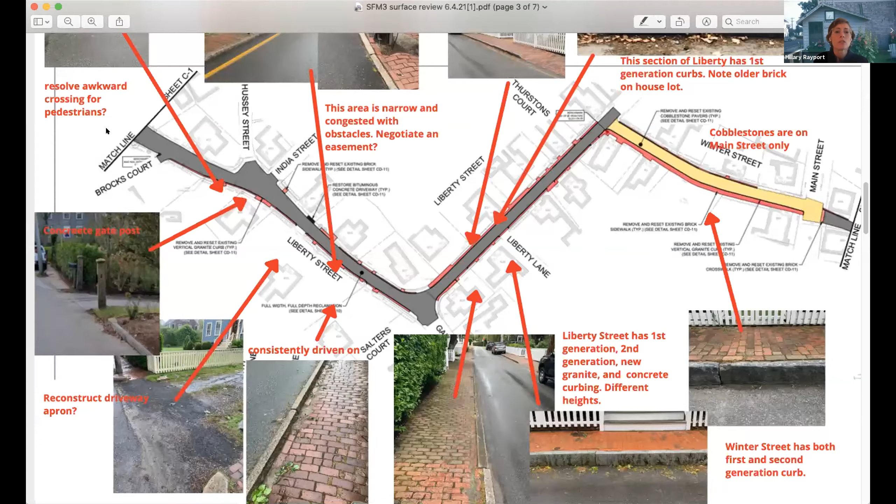Moving on to this bit of Liberty Street, we had said resolve the awkward crossing for pedestrians, and it looks like the DPW also flagged that, so we can engage with them on those details. We wanted you to be aware of these concrete gate posts right here, which look like they're right at where there's going to need to be some work, so that should be flagged.

That area is well known to us, and if you look on our plan, you'll see that I raised a concern to install some drainage in this area because of the groundwater that flows on this road all the time. I know Marsha very well—we actually just dug up in front of the African Meeting House on York Street the last couple of days. So Marsha and I have been in contact a lot about this area, and this line was also just replaced by a contractor because their sewer line had failed at these couple of homes right here.

But I know the apron is what you're referring to. I don't want you to think this is a specific request—it was an observation as we walked, that if you're paving the whole area, sometimes, here it says restore bituminous concrete driveway, but on the other side, right across the street, you've got this bituminous concrete driveway right next to this full depth reclamation, and it's not flagged. So on the off chance it was an oversight and you had intended to specify it, we just wanted to call it out as something that might be a benefit.

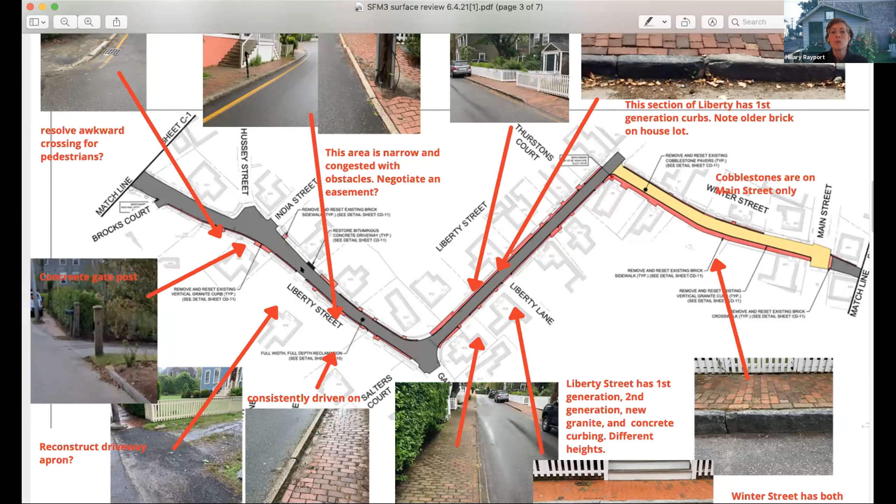Is there any possibility of an easement, of a widening here? I know we're getting into areas beyond sewer, but I bring it up because we'd like to help as advocates. The person you need to speak to is Marcia—she's not here, so we don't want to have a big discussion about her property, but is there anything we can do to help as advocates, as far as getting maybe an easement for a wider path?

Yeah, that's outside the scope of really this project, and really should be I think a town issue. I'm not sure what department would actually handle that. As part of the SRF loan, we're required to stay within the right of way and assure that we're not going on any private lands, and we've done that. So I don't know what the process would be. Maybe David, you can shed some light on that, because it does involve private property as you expand a roadway width.

Yeah, that can be tricky, especially if we end up doing a final survey on this, Frank, and find out that—and it's happened before—the road's not where it's supposed to be, or their hedge is not where it's supposed to be. It can become quite contentious on those pieces and parts.

This area I had called out specifically as it's an icing issue in the winter. The sidewalk has settled so much there because of the amount of groundwater flow that comes out of not only this home, but the home just up, which I think used to be England's home, just closer to Main Street. We were hoping to install some drainage structures in this area, which might help prevent some of this sidewalk settling that we see there.

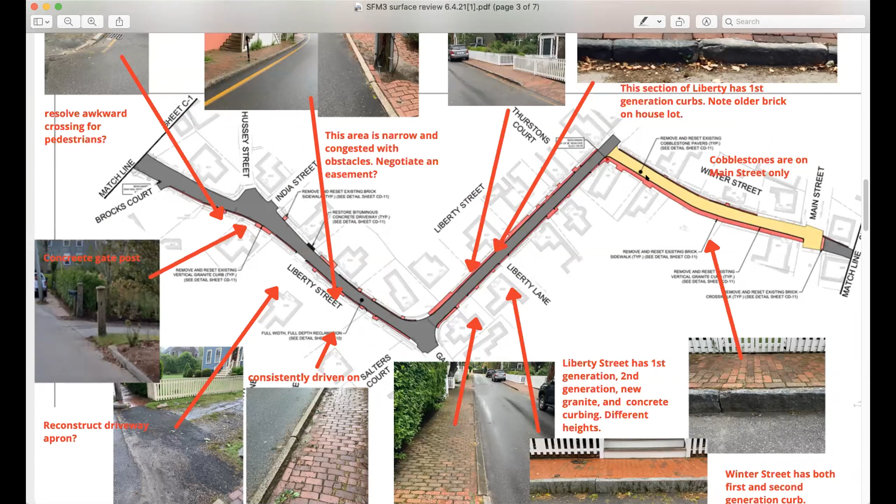But we can look further into that. That might be more of a question for Andrew, because I believe—and Hilary might be able to help me on this—I think all the roads within the current core district or whatever are considered county roads. They're not actually town roads, but I think they're county roads. Hilary, I believe you're correct that they are county roads. County commissioners have that. That would be bringing in another group, basically not the selectmen, but the county commissioners.

But I agree, I think it's important to try to separate what is actually under the purview of this project, under the scope, versus these kind of add-ons, which does make it confusing when you're trying to help address some of these concerns. But I think we just need to make sure we understand what is something driven for an accessibility perspective, which makes sense. As a planner, I don't disagree having accessibility is important, but obviously being historically sensitive, but also understanding that this sewer force main project is very important, and there is a specific scope that needs to be addressed. So I wouldn't want to hold that up, but put that off as a sidebar to say, hey, that's something to pursue.

Yeah, and it is the sewer force main project, but it also is a project that is improving accessibility in targeted areas. So it's a hybrid project. Also, when the work is so comprehensive with sidewalks, curbing, streets—as much as it seems like a distraction to try to pull in another aspect, it also kind of makes sense to tie it all together, since it's all getting disturbed anyway.

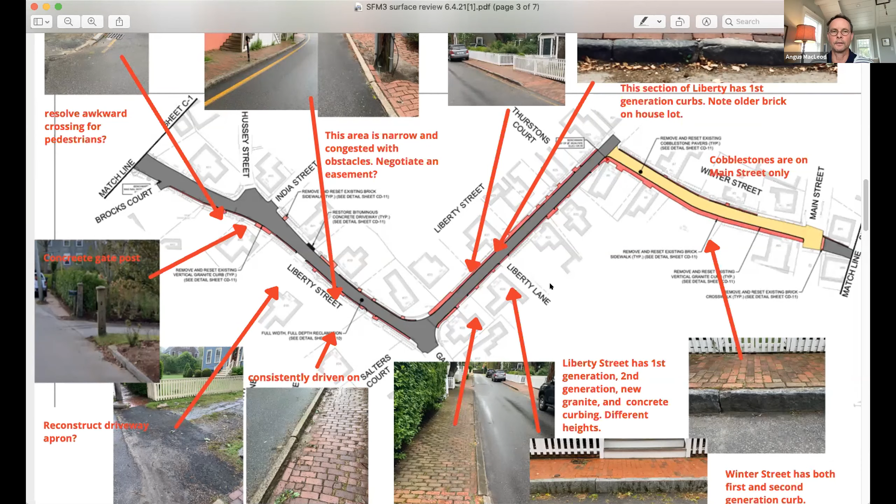So like Pine Street, where people are pulling off, and along Liberty Street where there's a bottleneck, those areas would have minimum curb height.

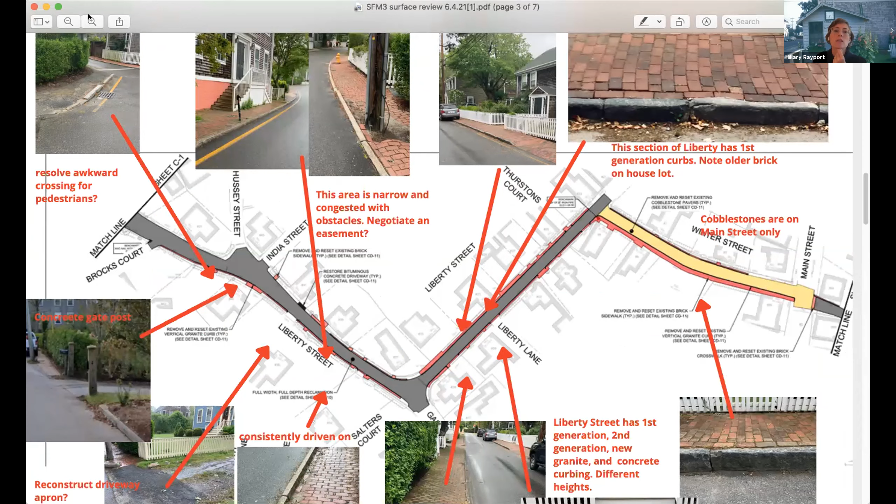On Liberty Street, shown here in light pink, that's just a localized disturbance of sidewalks. So this would be put back to match adjacent grades, right? If you have 2 inches on left or right, obviously that's what we'll do, match existing. But if you have a stretch like to the right of your screen, where all of that block would have to be removed and reset on Winter, then they wanted to have a 1-inch reveal.

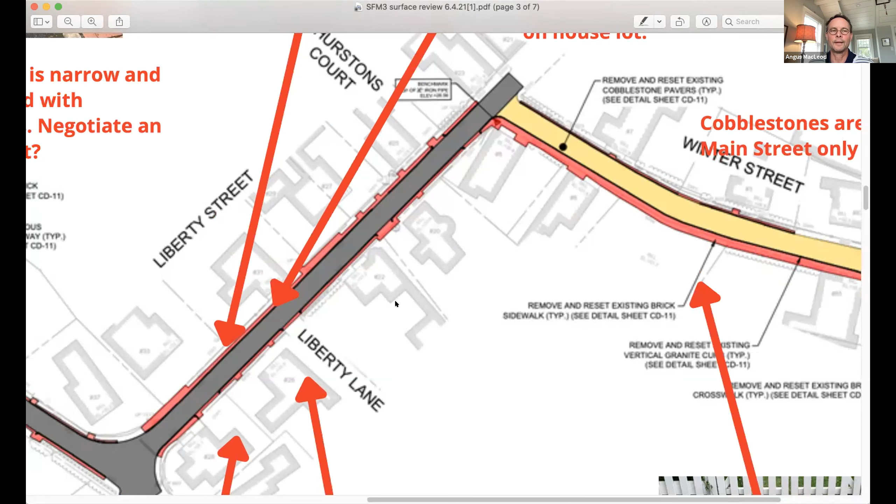On the south side of Liberty Street, on the right side as we're looking at it, even though it's diagonal, it has a very high curb and slopes up to the houses there. On the opposite side of the street, it's a lower curb. It almost looks like in that area the street wants to come up so the reveal isn't so high on the south side, matching a little closer on the north side.

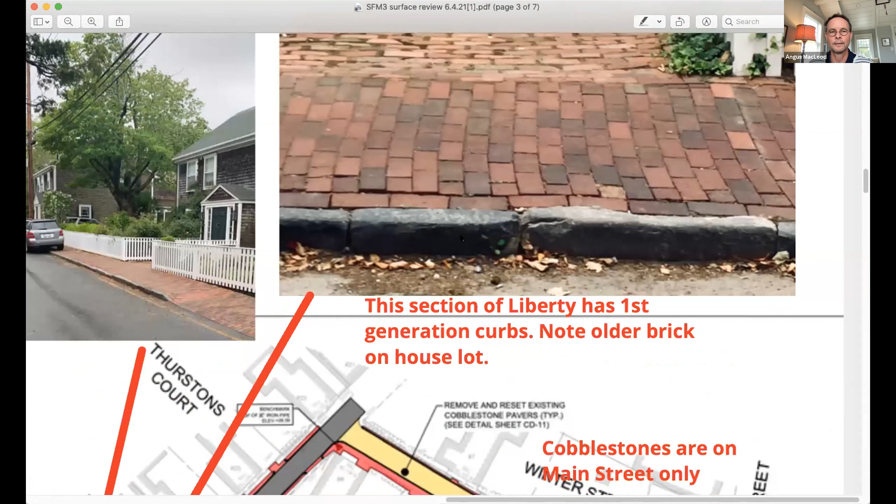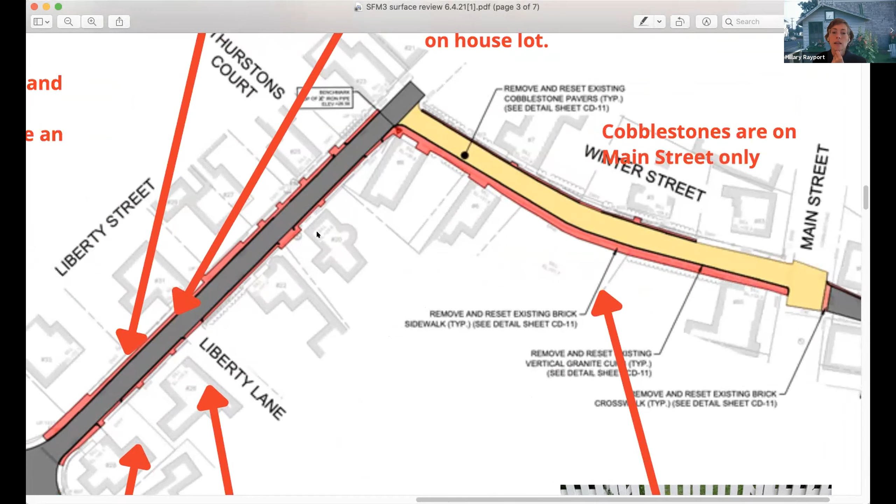I personally think a 4-inch reveal is a historic curb reveal. To move all of these curbs, this is not being patched—this is reconstruction all along Liberty Street and all along Winter Street. Even though it's light pink, it's the full length. I would not want to see that changed.

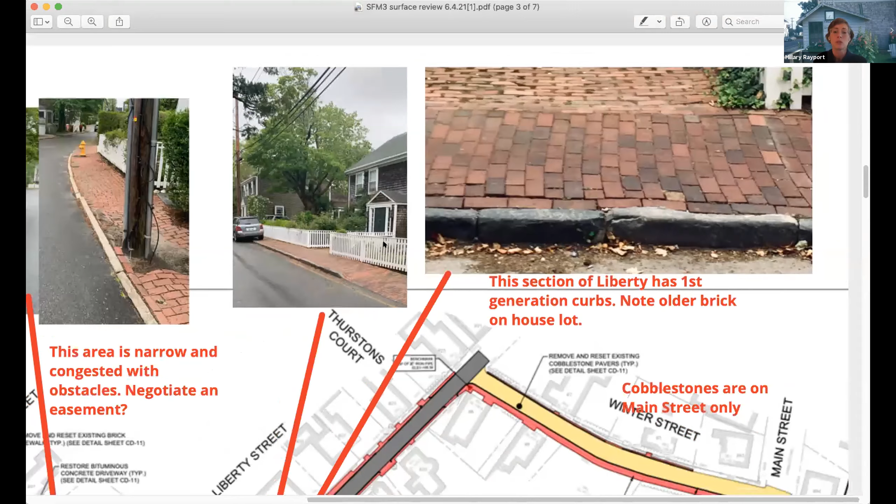There's only parking, there's no need to drive on the sidewalks on Liberty Street, and there's parking on one side, and people should not park on the sidewalks. It makes them inaccessible, and it's actually against the rule of the town. We have a policy that people should not park on the sidewalks, which is not enforced, but it's written and it makes the sidewalks impassable. Moreover, on the other side of Liberty, nobody is parking on that sidewalk—it's no parking.

I really agree that we shouldn't have 1-inch curbs everywhere. I think what we'll do is validate that with DPW, just to make sure that's still their plan, and we'll bring up this concern.

Frank, go ahead, Holly. I'm sorry, for what it's worth, I really do agree with Hilary on this, because that would really change the streetscape, and that's the most important thing—to retain that streetscape. Would agree, yeah, that would be the point.

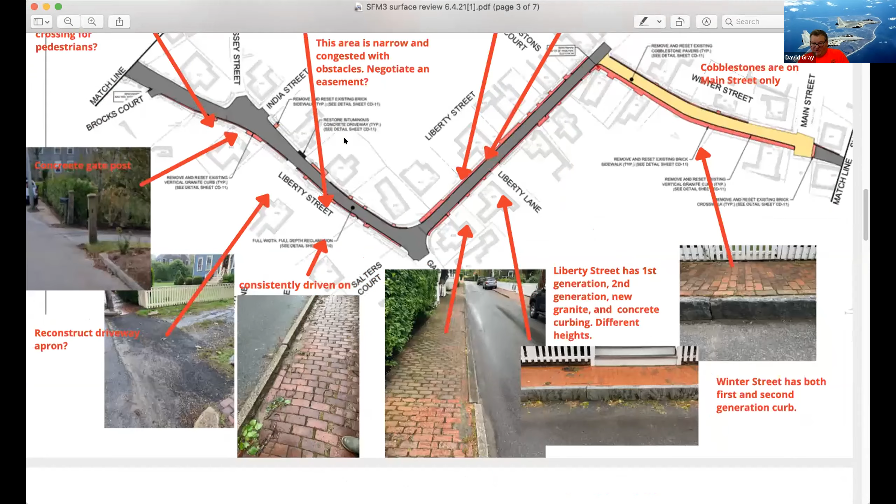One thing we have to be careful with lowering reveals of curbing is water flow, drainage, the runoff. This section of Liberty pitches down towards Winter, and the stormwater system goes all the way over to India. So some areas you're going to want a little bit more than 1 inch, because we can't allow any stormwater to flow onto property—we do have to be careful in some spots.

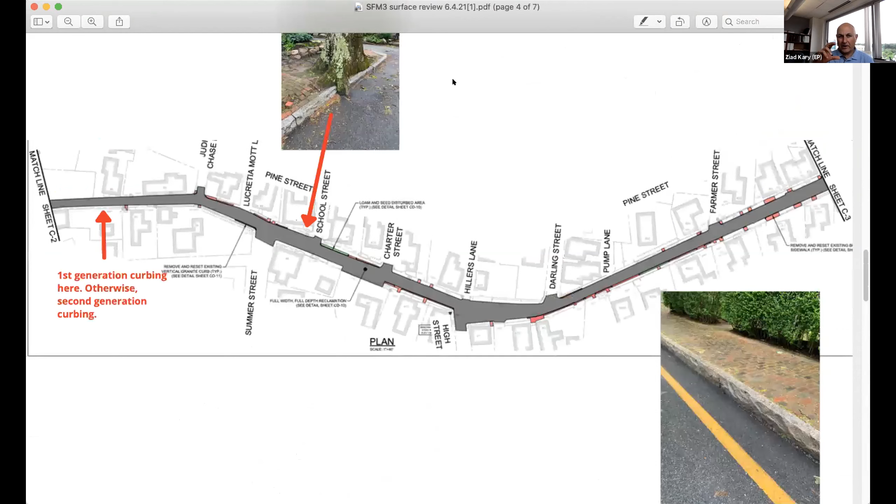But from a design standpoint, we also agree with that, because the curb, if anything, provides a buffer. If a pedestrian is walking on the sidewalk and you have a 3, 4, 5, 6 inch reveal, and somebody's not paying attention, a curb could potentially be the saver. Otherwise, if you only have an inch reveal, a car could easily move on top of the curb and, God forbid, hit somebody.

That's really how curbs serve a purpose. I agree, the curbs serve a purpose. There's a historic way these curbs should look, especially the old curbs—we want people to be able to see them, they're attractive. I think it really should be the exception.

Could I hear from some other commissioners if you support this, or if you have a different viewpoint? From the section of Liberty Street we're talking about, from Gardner Street to Winter Street on the south side, as we noted on our walk, the curb gets higher and higher the closer you get to Gardner Street. And that curb in that one section is made up of 2 or 3 different materials, if I'm not mistaken.

Thanks, Hilary. I wanted to comment about the height of the curbs, because in many of the streets on the island, in these streets in particular, there is parking. The streets are wide enough to park on the street, but because in some cases the curbs are so low, people are concerned about their cars and will actually park on the sidewalk when they really don't need to. A low curb encourages that.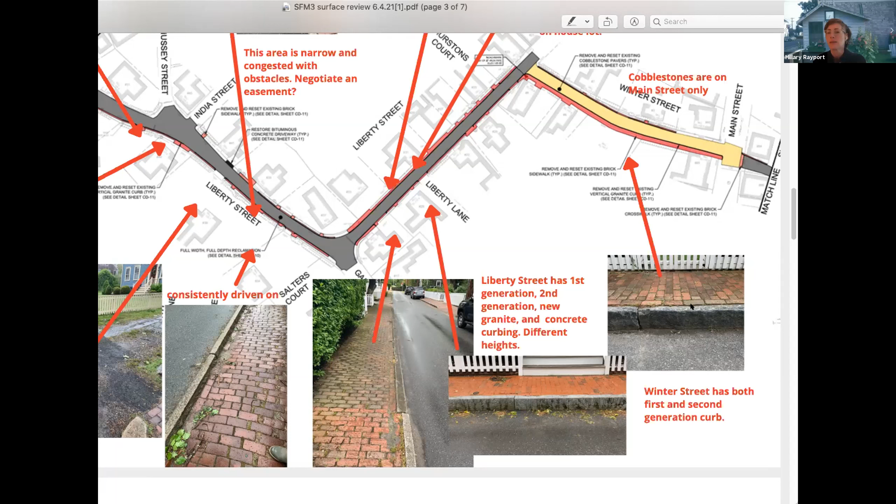Winter Street — so all along Liberty, a special note: the old curbs are here on this north side. On the top of the picture on Winter, we have old curbs. That's a sensitive area. I wanted to show you this picture on the right — these are the old curbs, and we think the homeowner probably had to dig up or do something to the sidewalk here, and it looks like they're actually sitting on top.

I just point out the picture because it emphasized to us how we need some investigation into how you really manage these old curbs and set them properly in a way that everyone can be happy with functionally, and how they look. And you all said that was part of your plan.

We think that they're sitting on concrete — isn't that right, Hilary, in that particular instance? But it's also possible that they have two halves and they're narrower in one part. It was clear that they had been lifted and reset, and we weren't really sure how it had been done. It did look like it's just sitting there, but the only way to know for sure is to investigate it. Usually we bed these things in concrete so they don't sink, and then you have a disproportionate height on the curb over time versus the sidewalk, exposing the brick edge.

So our detail will take into account the historical reveal of the existing curbs and how we might modify that detail when we come across situations like this. What Hilary is referring to on Winter Street — that house where this picture was taken in front of was just renovated in the last couple of years, so it's entirely possible that they've completely redone that sidewalk and the curbs.

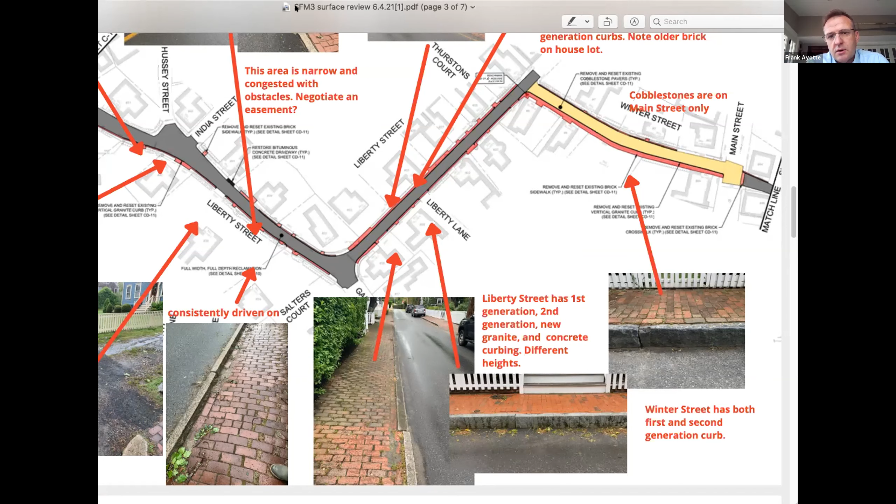They're actual concrete curbs, probably cast concrete. I would say it's unlikely to be salvageable. There is a curb replacement that DPW has specified. It's quite an expensive curb, made to look historical. But my experience with cast concrete curbing removal and replacement is that it just doesn't hold up, and it's liable to crumble, fracture, or break during the removal and replacement process.

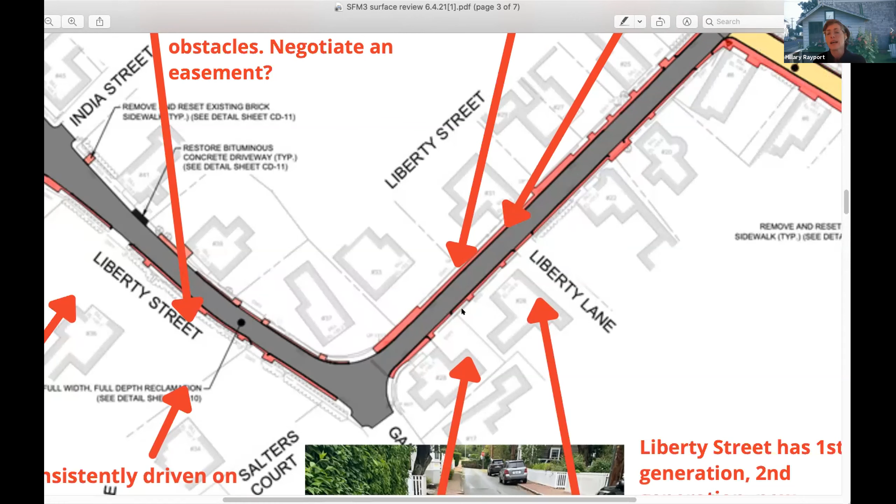So is this restoration here where you see the concrete curbing, all of this, is that you need to lift this for access for your project, or is that a restoration at the request of the DPW?

Yeah, I think that one has to come off, just because by the time we put all utilities in place, nothing really would be left on the roadway and then along the curb line either. So that has to go.

And then back to what Frank was saying, this concrete curbing was cast in place, so it really doesn't have specific lengths. And if you're trying to, unless you saw cut it in place and then hopefully are able to lift it and not damage it, I'm not sure if there's a way to put it back.

No. Also, I'd be honest with you, I think the replacement material that the DPW specs out is a nicer looking curb than some of this concrete, whether being historical or not.

It is a historical looking curb. Also, most of that concrete curbing, or a great deal of it, is already broken up in 2 and 3 foot pieces anyway, and it's just almost going to be impossible. It's not salvageable.

And also to add, that concrete curbing spec you're referring to that DPW has is actually what came out of the HDC approval process with the stuff that happened down on Washington Street. And I believe it's the same stuff that's been done on any projects since then.

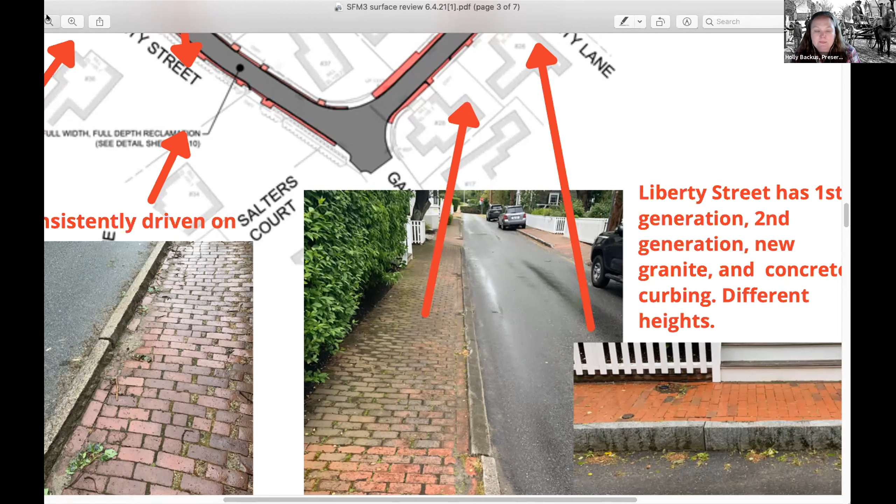Having just seen what happened on my street in the last 8 weeks, the house across the street had all cement curbing, and the brick house next door also had all cement curbing. Those guys, who I very much tried to work with as a preservationist to retain that curbing, as hard as they tried, it does not work. And the reason I've made the comments I've made this morning are based on what I saw.

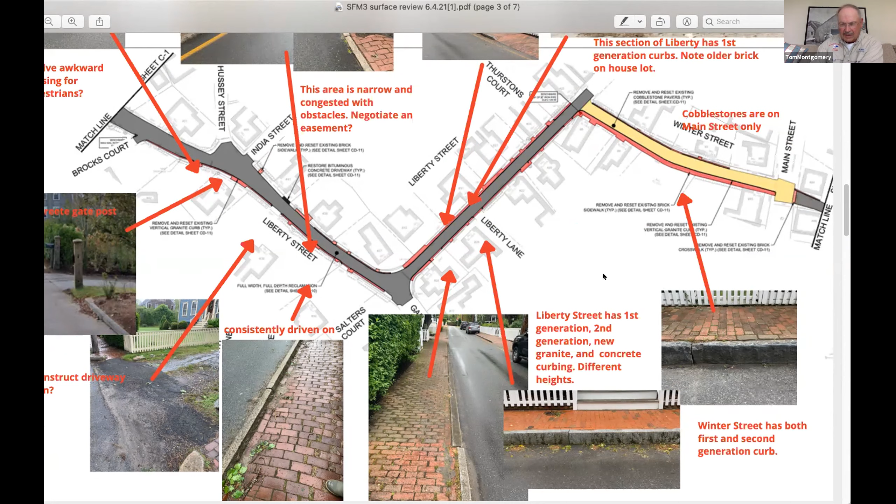So when you have a situation where there's not a material that can withstand the improvements necessary over time, do you replace with like kind? When we're looking at this photo, if what's in the middle has to go away, do we replace it with like kind, with what's on the right, or with what's on the left? Part of it is aesthetics, budget, and accessibility. I think if concrete wasn't possible to replace with like kind, most preservationists would prefer what's on the left of the screen over the right.

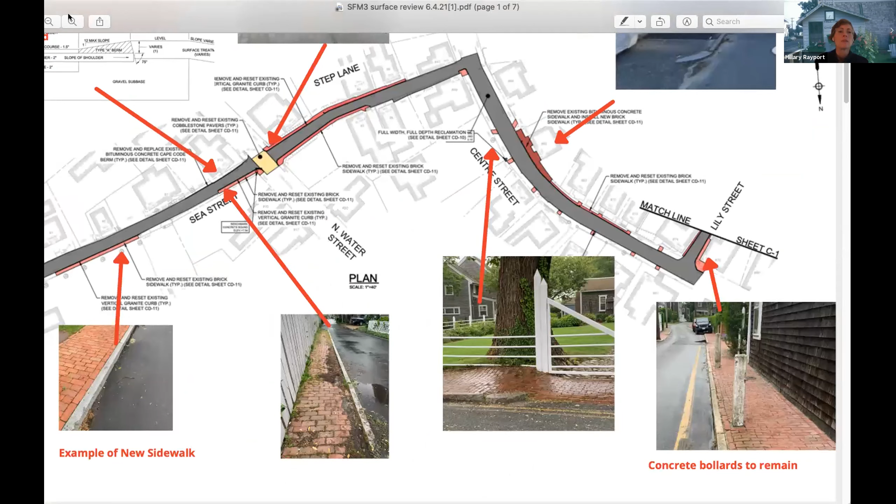But I think what it's going to be, Angus, maybe Frank can tell us - is it this new curb that was specified? Is that what's being commented on, on Sea Street, the new sidewalk put in across from the pump station? I believe that is it. So that's probably what you're looking at. It's manufactured to look like a granite curb, more rough hewn.

Is there a way to get one with a rough top like the sides? I think this one was investigated quite a bit to come up with this product. You'd have to ask DPW. That was installed privately, I don't think that was the town. It looks very similar to what was - could we get a picture? There was a parking lot there before that curb and sidewalk, and I don't know if that's the curb.

Holly, maybe we could get a picture. Anyway, this sounds like something that's a specification we need to take up with DPW along with the other specifications. Because where we're demoing curb that can't be salvaged, we're using the DPW spec.

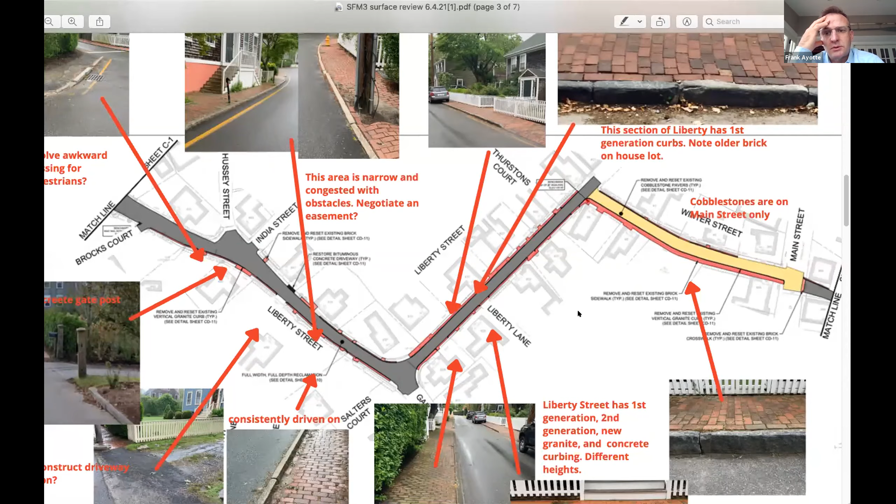Well, I would think they could show it to us. Moving along to Pine Street - I think you're going to find cobblestones under Pine Street. Have you done any investigation to see if there are cobblestones there? We did do geotechnical borings. Ziad, did we run across any cobbles during the boring process? No, but the thing about geotechnical borings is you're going with a drill rig, and the diameter is 1.5 inches, so you could technically be between two stones, or the rig could bounce off a cobble and suddenly you're in subgrade and you wouldn't know it.

The section of Pine Street from Main to Darling was replaced during the 2008, 2009, or 2015 sewer project. That's all brand new sewer in that area - old water too - but that was replaced when they did Fair Street and a lot of the other side streets in that area. When they crossed Main Street, that's when they replaced that section of Pine.

Were there cobbles, David? I don't recall - some of that was done by pipe bursting because they pulled in an HDPE liner in this area. Well, what we can do if we are going down that street and encounter cobbles, the intent would be to stockpile them and send them to DPW, so we can notate that.

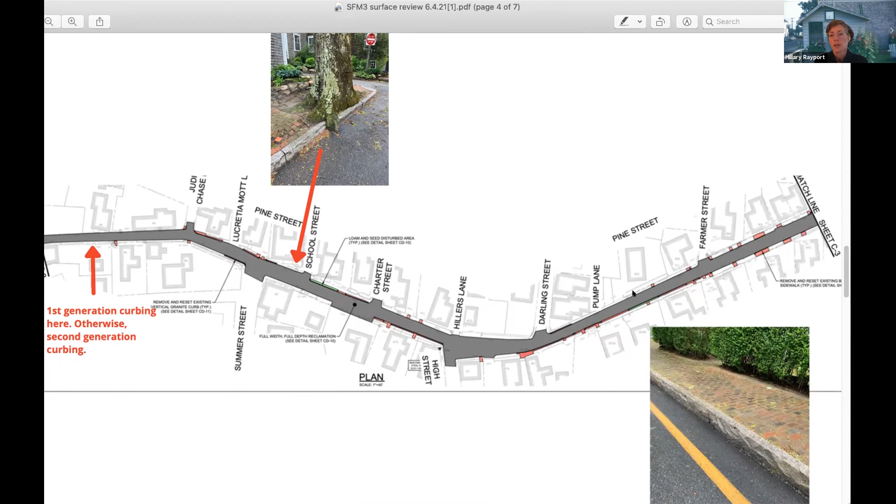There's very little sidewalk work happening here - let me bump this up. So I guess there's some more sidewalk work along here, but this is what most of the sidewalks and curbs look like along Pine Street. There's first generation curb just in this area right here, just for your notation about things.

We think this looks really nice - great reveal, beautiful curbing, everything looks great. So I guess the expectation is that it gets put back just like that. Yep, yeah.

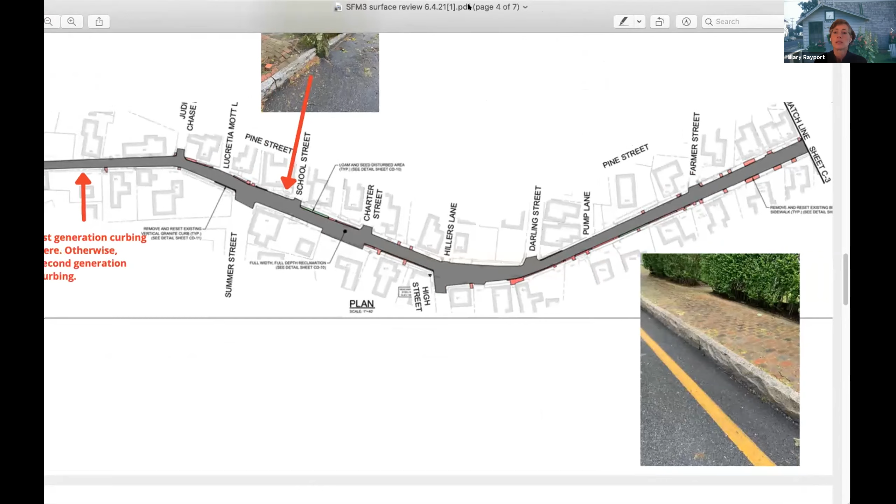I guess I'll also mention, I do hope if there's changes to dimensions along here, if the DPW is thinking about requesting changes to dimension, that we're going to know about that, Holly. We're looking at this plan, but this plan doesn't have everything that the DPW wants - it doesn't say anything about a 1-inch reveal curb. So I guess we just want to make sure that as things change from this plan, we have a chance to comment.

I don't think there are any meaningful comments here. We noticed again that you're continuing this as asphalt, which would be great if it were brick, but that's an expansion of the scope.

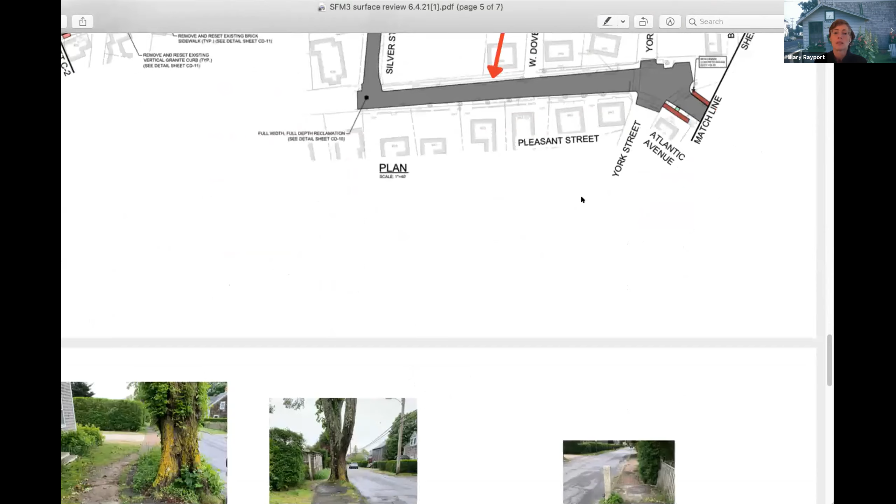A couple things to note here: these trees, you can see people have made their own little path, but there are some important trees here. If you could mark this concrete bollard, try to get it to stay in place. We'll have a notation that all concrete bollards, if disturbed, will be reset in the same location, because this is all coming up and you're going to be putting in new brick.

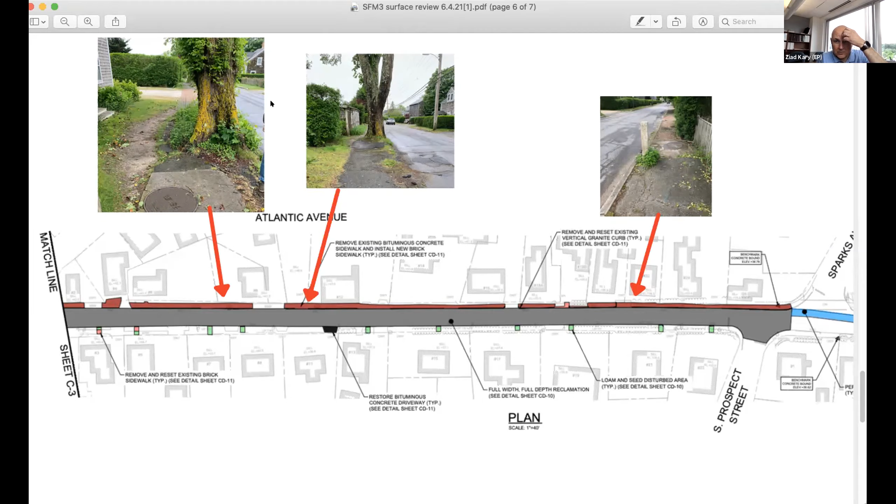Was this Atlantic Ave? This is the spot that's pretty much the area where you have those catch basins that need to be fixed, and it's flanked by existing brick, so we'll take that asphalt up and put in brick.

So Frank, I thought we're gonna keep this as bituminous concrete instead of brick, since we're only replacing the drainage there. That's right. One of the things DPW requested here was to only take care of the drainage, and wherever there's missing curb cuts, put in curb that's missing so we can pave the street curb to curb, and they can come back and redo the sidewalks.

Okay, because it says here to remove existing bituminous concrete sidewalk and install new brick, which I assumed was down the whole area. Right, and that was just before we had a funding meeting on DPW's requested items. So we removed the idea of replacing the bituminous stuff with brick because of funding, and DPW was going to handle that at a later date.

Hilary, can I make... Yes, of course. I hate to interrupt, but I'm going to have to leave shortly. I just wanted to ask a question of the engineers regarding ADA concerns.

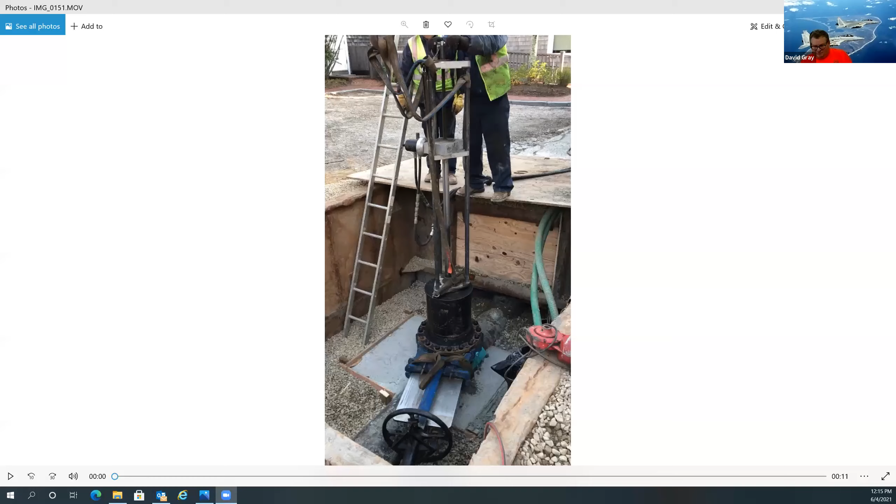If you notice, this is when we had to do a tapping into the force main to plug it. If you look behind where the people are standing, that's what Sea Street used to look like before NIR went in and sidewalked and filled in that whole area. It was that way for the length of it—it popped out by the telephone pole, then went back in.

That was all done by Nantucket Island Resorts when they took all those buildings down, changing that whole streetscape. That was 2007, 2008. They changed that Harbor House streetscape. We didn't do that. You know who built those? CC Construction? No, I meant the Harbor House houses themselves. Yeah, one of those old local people, related to me, I wonder who. Possibly related to me too, somehow along the line.

One question I had was about the catch basins. Are there going to be more catch basins going in? Is that a detail we might want to look at? It's genuinely a question, I don't know the answer. Potentially there may be a few more being added in.